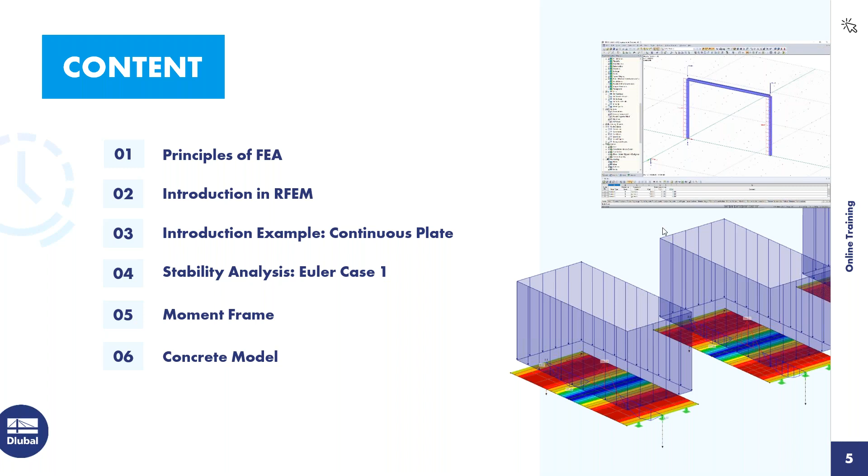So now we can dive right into the first subject, which is the basics of FEA software. When using computer software like FEA software, it is usually based on the displacement method. Another method you may be aware of is the force method, where the unknown is the force and the internal forces can be calculated. With the displacement method, the unknown is the displacement. So to solve for this, the displacement vectors must be calculated, and then the internal forces and support reactions can be determined.

So the main problem is an analytical solution can be difficult to determine with large complicated structures. Doing hand calculations for some structures with complicated and odd geometry can almost be impossible or feel like it's impossible. The limits are being reached with large complicated structures, and it's just difficult to get accurate results. And so this is where FEA software comes in.

So structures can now be modeled and converted into a finite interconnected element mesh. The material and cross-section properties are given at each FE mesh node, and then the mechanical behavior is transferred between these elements. Discretization is a word that I would like you to walk away with, and this is the act of structures being submeshed into finite elements, which is done in FEA software.

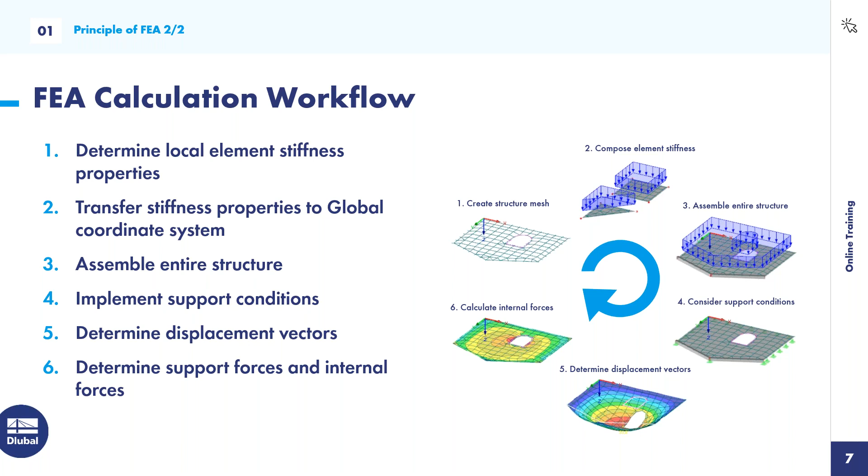So now we can move on to our example. For this example, you can see a couple of continuous plates, and we are going to compare the moments between these plates with the continuous beam on the end so we can get an idea of how the calculation differs between those.

But before we do that, I do have a question or a test to give. So I'm going to pull that up, and you should see that on your screen right now. I'll just give everyone about a minute to answer that, and then we can go over the answers.

Okay, so it looks like almost everyone has answered, so I'm going to close the question. And you can see the results here. So it looks like 18% of you answered the second option, and 82% of you answered the first option, and it looks like most of you got it right. So the actual correct answer is: the decomposition of structures into finite elements is what discretization is. So that's great. Good job.

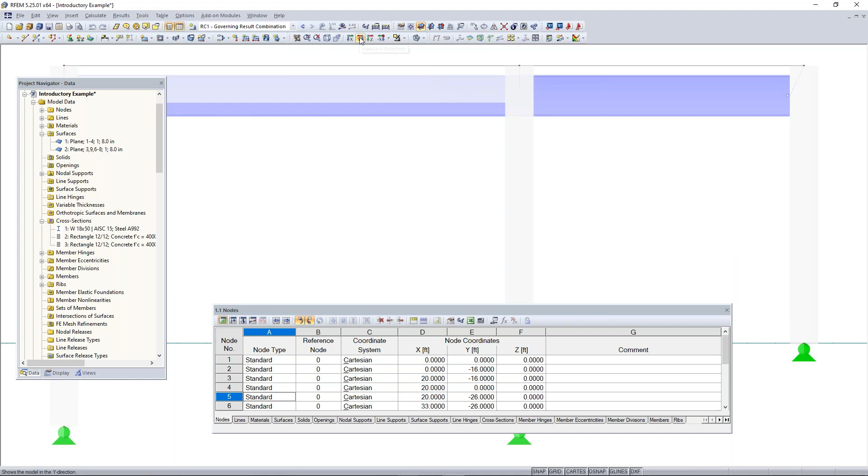Also, we have our insert menu. So if we go up to Insert, this is another place where you can insert model data, such as nodes, lines, and materials. We can also find these options up here in the toolbar. We can also change the view of the model. So if we go up here, you can see in this category of the toolbar, we have views in the X direction, the Y direction, and the Z direction. We can also change these into the reverse direction. So if we want an elevation view of our model, or maybe a top-down view, we can choose these views.

Then in the project navigator, we have at the bottom here in a folder called add-on modules, our add-on modules. RFEM is great for viewing things like internal forces, but if you want to design your structure or elements of your structure, you will need to use add-on modules, and all of the student versions of RFEM come with every single add-on module. So this is pretty handy, and you can play around with these. They're basically just for design of different materials, and you can see that's how most of them are organized.

You can also find the add-on modules up here in the toolbar, and you can see that they're organized again based on design. Next, we have in the project navigator our display tab down here. The display tab basically allows you to turn aspects on and off within RFEM. For example, we can turn off something like our surfaces, and this just turns off the rendering and display. The surfaces are still there within the analysis, but this just allows you to turn them on and off visually. You can see that this is all organized based again on these expandable and collapsible folders. So things like loads and results, we can also turn on and off as well.

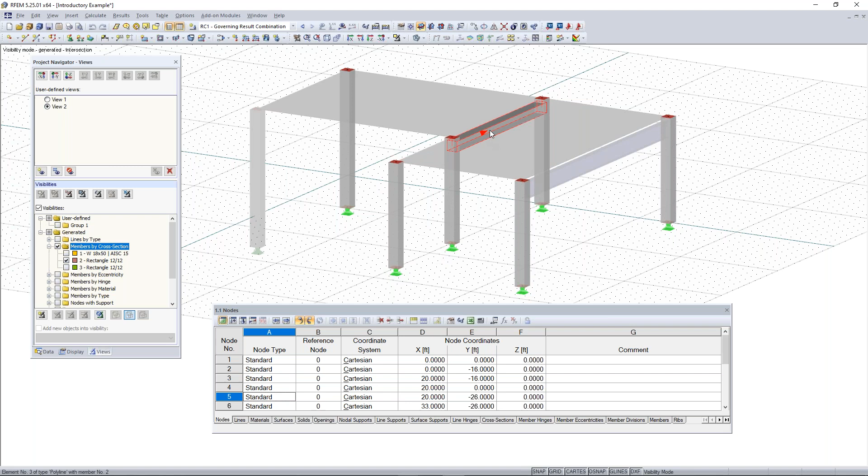And then the next tab we have is our views tab. So we can create a visibility by turning our visibilities on. You can see right now I have my members by cross-section checked. If I turn this visibility on, only my members by cross-section that have a cross-section of W 18x50 here will be shown. So that's my beam member right here. If I turn that off, then everything is turned off within my model.

And I can do the same thing for materials. So if I only wanted to view, let's say steel A992, then this is the only thing that will be shown in my work window, and you can see the rest of the model is grayed out. I can right click and uncheck show hidden objects in the background, and then we have just simply our beam there.

Next tab to show, if I turn off my visibilities, is the results tab, and this is the last tab in the project navigator. If I turn on my results, you will see that the results tab will pop up here. Again, it's organized similarly to the display and data tab. I'm not going to go into the results in detail right now, but we will later on within our other examples. So I'm going to turn these off.

And then the last thing to go over before we hop into our example is how to navigate through RFEM. We can click in the scroll wheel button if we want to move our model around. You can use the scroll wheel to scroll in and out, and then we can hold Control and click in the scroll wheel to rotate the model.

If you don't have a scroll wheel, you can go up here to this tool, called Move, Zoom, and Rotate. You can click on that and then left click to move. You can also hold Shift and zoom in and out with left click, and then you can hold Control and rotate the model. So that's pretty handy. You can also do all of this with the arrow keys on your keyboard, and they perform the same function.

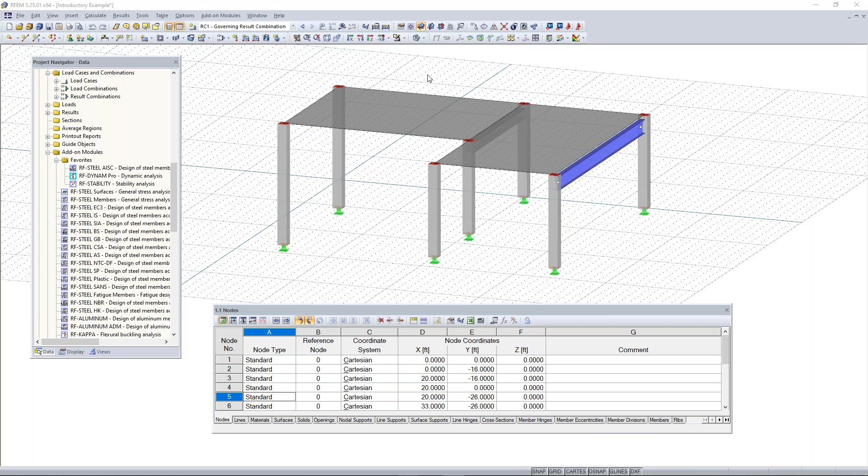So now we can go in and open our new model to start off to model our continuous plate example. First, let's go up to the new model button, and this is a way to create a new model. You can also do this by going up to File and clicking New. Then we'll go to our model name, and we have to give each model a name. So we'll name this continuous plate example. You can also enter a description for your model. You don't need to enter a description, but it is an option here.

Next thing to look at is the type of model. This is going to be a 3D model, but we could make this a 2D model, and you can choose the plane where you want your 2D model to lie in: XY, XZ, and then also the YZ plane. So those are some options here. We're going to leave our type of model as 3D, and right next to that is how the load cases and combinations are classified, and you can select which standard you want your load cases and combinations to be according to.

We have a long list here of international standards, so we have the US, Canada, Eurocode, and a list of others. So for now I'm going to leave this as none, but let's say I wanted to design my model according to the ASCE 7-16. We have the option to create combinations automatically based on the load cases you create, and then the action categories are taken from there as well, and everything is created automatically. For this example, we don't need to worry about a standard, so we're just going to leave this as none.

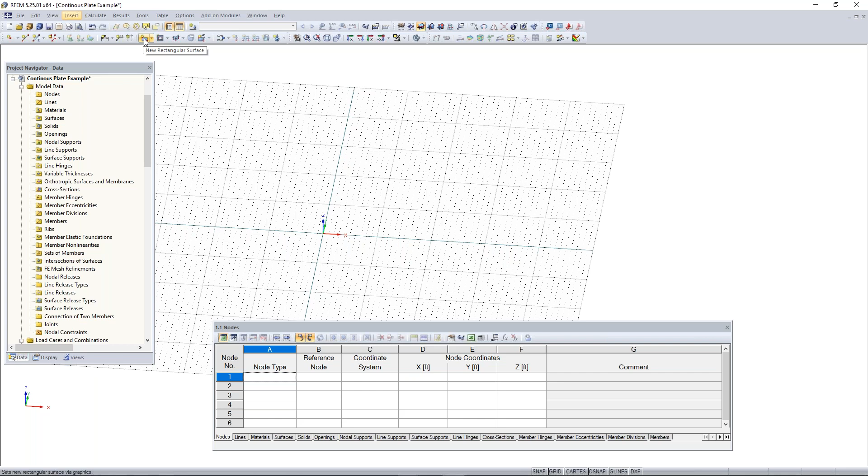So we'll click OK, and now we can begin with modeling our concrete plate. To model a 2D surface in RFEM is pretty simple. All we need to do is either go to the Insert menu up here and then Model Data, and then we can go to Surfaces, and you can see we have a lot of different surfaces to choose from. We're just going to choose Plane, or we can choose Plane and then Graphically, and then we can choose a rectangular surface - our plate today is going to be a rectangular surface. Or instead of going to this menu, we can simply just go to our toolbar up here and locate the new rectangular surface toolbar button, which looks like this right here, and we can click on it.

Our new rectangular surface dialog box will pop up. The only thing you need to worry about here, if you're not changing anything, is we'll keep the stiffness as standard. We just need to tell the program what material the surface is going to be and what the thickness will be.

Right now it's saying create new material. We can either create a new material and enter the properties using this button, or go to our material library and select a predefined material. So we'll click on that button, and the material library will pop up in just a second.

This is the material library within RFEM, and whenever you're choosing a material for any element, this is what will pop up. On the left-hand side, we can use the filter to find the exact material we're looking for, or type it in the search bar. I'll just use the filter for this example, so we can choose concrete, and then choose concrete again for the subcategory.

I'm just going to use ACI concrete for this example, and choose the latest ACI standard, 2019. Then I'll pick concrete 4000 PSI. I'll choose that, and down here you can take a look at your material properties if you want to check those out. Then we can click OK.

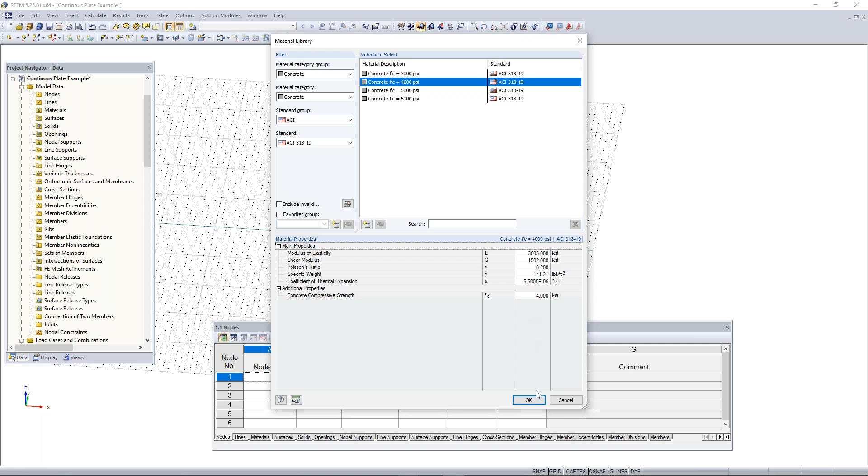Now we have our material chosen, so all we need to do is tell the program how thick we want this material to be. By default, for imperial units, 8 inches is selected. We want to increase this to 12 inches for these plates. Then we can click OK, and now we can draw our plate.

My cursor has turned into this reticle-looking cursor, and I have the coordinates right next to it telling me where I'm located along the XY grid plane. I'm going to choose the origin and draw a 32 by 16 foot plate. So all I need to do is move horizontally 32 feet, then move up 16 feet in the vertical direction, and then left click.

So left click at the origin, then left click a second time to mark that second point. Then I can right click, and once I right click, that will cancel out of the tool. You can also hit escape if you like to cancel out of a tool.

Now you see we have our plate here, or our rectangular concrete surface. The rendering in RFEM is just simply a 2D element with boundary lines defined, but in the calculation the stiffness will be taken as 12 inches thick, so no need to worry about the rendering. This boundary line is always located at the center of the surface, so there will technically be 6 inches on one side and 6 inches on the other side.

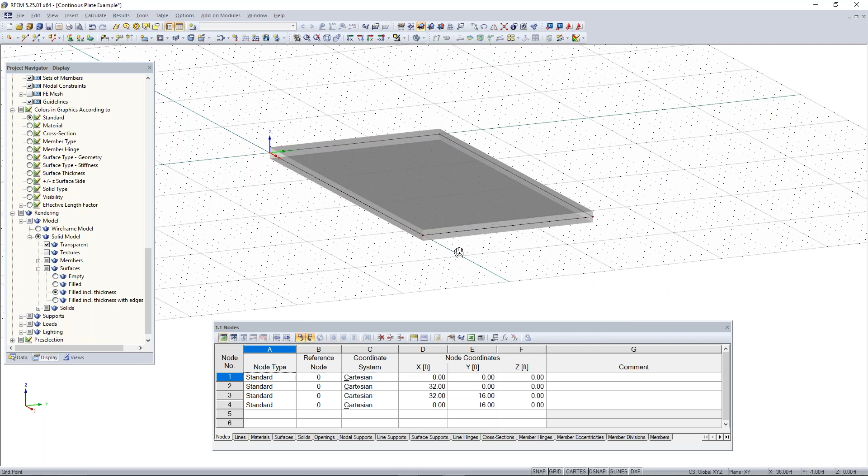If I go to my display settings and scroll down, we can change the rendering real quick just to show you what I'm talking about. If I go under rendering and change this to filled, the definition of the surface is always at the center. So if this is 12 inches thick, there's 6 inches of thickness on one side and 6 inches on the other. I'll turn this back to default, and then we can move on with modeling the other plates.

I can model the other plates by just going back to that tool and clicking OK. I'm going to model the second plate right above the first one, 5 feet away from the first plate. So I'm just going to draw this one, and again it's going to be the same dimensions, 32 feet by 16 feet. Then I can right click to exit out of that.

Let's say I already have this surface here and I need to duplicate it. I can simply select this second plate by highlighting it from right to left or left to right, and then use the tool up here called Move and/or Copy.

This tool allows me to make one copy of the element I selected, and then I just need to tell it which way to displace it within the plane. I can either enter displacement vectors, or use this graphics tool. I'll click this button, choose my bottom point, and move it 5 feet above where this plate is located. I'll hit OK, and now I've made one copy of this plate.

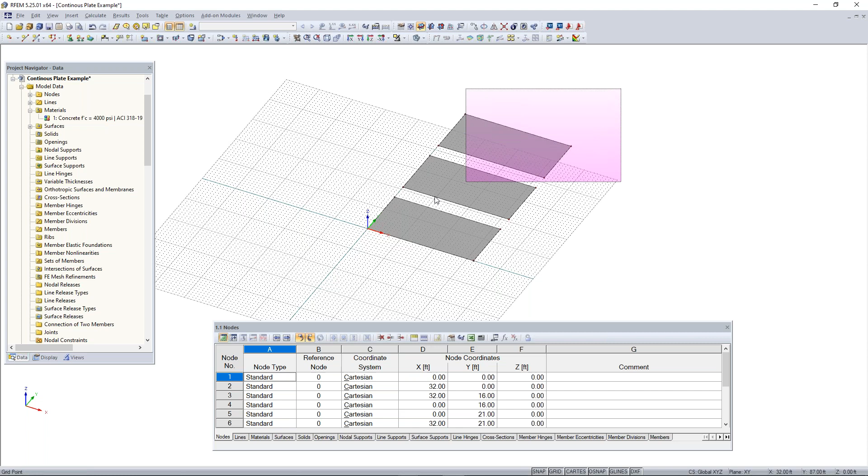So now we have all three of our plates here, and since my grid is only 50 feet by 50 feet, I'm just going to highlight all of my plates, left click, and then move my plates down into more of the center of my grid.

Next thing we want to do is model our beam. So I'm going to create a new cross section or create a new member. To create a new member, we can either go through the insert menu or choose the button here, new single member. I'll click on new single member.

Under new single member, I'm going to go to the cross-section library. This is the new single member dialog box, similar to the surfaces dialog box, where we choose our member type. For beams and columns, we want the member type beam. Then for our cross-section, we can choose cross-section start, either creating a new cross-section or going to the cross-section library to choose a predetermined shape. I'll click on the cross-section library.

Once that pops up, you can see our cross-section library is organized by rolled and built-up sections based on a standard. Then we have parametric thin-walled sections, where they're parametric so you can choose the dimensions manually. We have parametric massive, usually used for concrete, and parametric timber, which you can use for timber and choose dimensions. Since we're using concrete for these plates, and they're rectangular in shape, we're going to use the rectangular cross section.

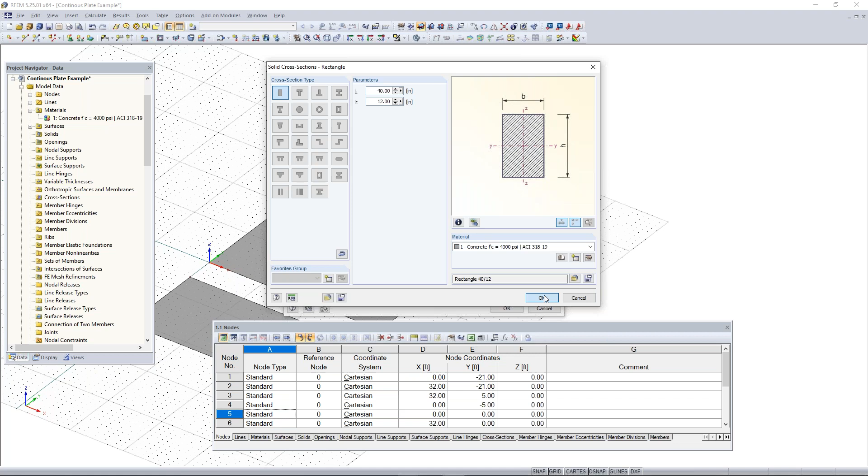The rectangular cross section parametric window pops up, and we can change our parameters. We can make the base 40 inches and the height 12 inches. Now that we have our dimensions in, we can choose our material just like the surface. Since we already defined this concrete 4000 PSI material, we can simply use that instead of going into the material library again. We click OK, and then click OK out of that box.

I'm just going to draw this continuous beam 5 feet above this plate, so it resembles this plate, and then we can easily compare it in results later on.

Once I draw my beam, you can see the rendering looks like this rectangular shape. If I change my model from a solid transparent display to a wireframe display, you can see that all members drawn in RFEM are simply 1D elements, and that's how they're calculated in the background. The shape you see is just a render over that 1D element, and all that's used is the cross-section properties and material properties to calculate the results on this member.

You can also see that our surfaces are just made out of these four boundary lines, and this dotted line shows that there is a surface made up here. Again, we can use this button to change the rendering of our model, and then move on with dividing up our lines and adding some supports to our model.

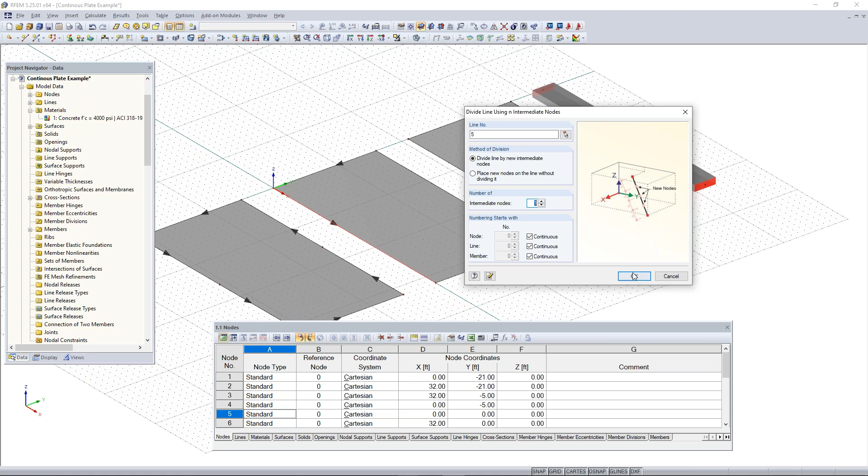And so what we can do is choose how many nodes we want to divide this line equally by. We're just going to choose 1 and click OK. And then you can see the line is divided equally with just this 1 node in the middle. So then we can again do the same thing for this line and click OK. And now we have our 2 lines here divided by our nodes.

The third option for dividing a line is to use the distance tool. So with this tool, you can divide a line by distance and get a little more accurate on where you place your nodes. So this is mostly why you would want to know the orientation of your member when you're dividing a line, so you can see that I've chosen this line, and here's the start, here's the end, and I can type in 50% from the start or 50% from the end, or I can type in a specific distance. You can see 50% is halfway through 32 feet, so 16 feet.

And we want to use the true line length, and then we want to divide this line by a new intermediate node. So I'll click OK, and then you can see just like this, it's divided halfway through, and then I can do the same thing for this last one. So now what I need to do is divide also this member. So I can just do that using a distance halfway through, and I'll click OK.

And now what we need to do is add supports to the rest of these plates, and we need to add line supports to the center of these plates. So what I have to do is add in a line. So I can just go up here to the new line tool. And then I can draw my line, and you can see my cursor snaps to these nodes here. So I'm going to snap to this node and then to this last node.

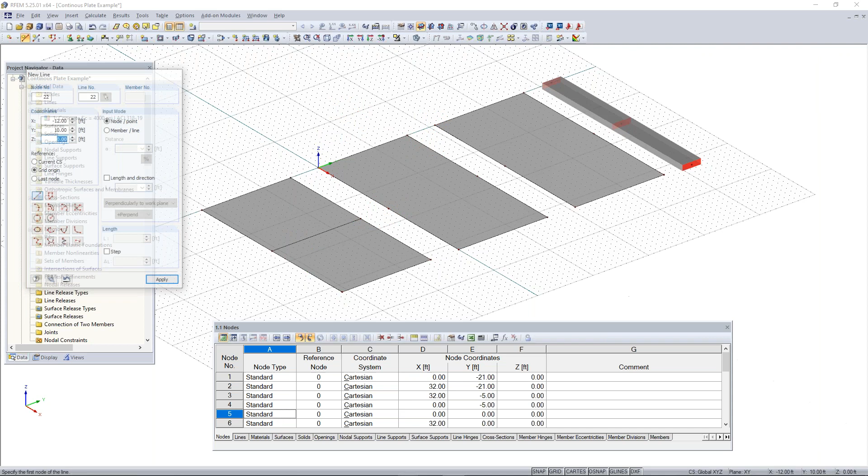And then I can exit out of that tool, and instead of drawing the rest of these, I can use this pretty powerful function where I can click and select a line here. And whenever you click and select something, you can hold Control and then left click and drag. And that allows you to make a copy and drag that element to wherever you want. So I'll left click, hold Control, and then I can drag this line again to the last plate there. And now we can add in our line supports.

So within RFEM, there's two different supports. We have nodal supports for just single points, or line supports to support the whole entire length of a line. So I'm going to go up here to the button New Line Support. And then I'm going to add in hinge supports. So what I can do is choose from two different presets we have for line supports. The hinge support is fully fixed in translation, but fully released in all of rotation. And the rigid support is fully fixed in all 6 degrees of freedom. So you can see how all the degrees of freedom are checked off, showing you how the condition is defined. So I'm going to use the hinge supports and click OK.

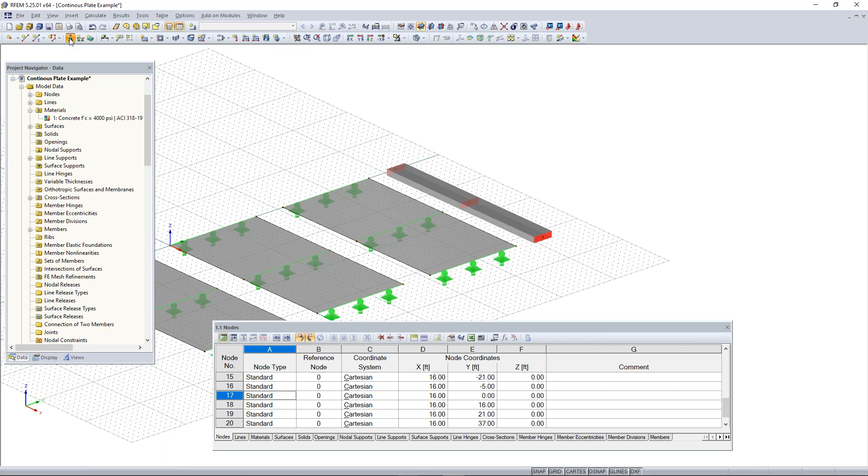And then I can choose and click on each of my lines here. And I can simply do that for the rest of my lines to add in my supports to these plates. And then we can do this for the beam, but for the beam, we're going to be using nodal supports. So I'm going to go up here to my new nodal support. And this is similar to line supports, but you can see we have a couple more options. So we have hinged, rigid, and then sliding in the X and sliding in the Y directions.

For the first two supports, they're going to be hinge supports. So I'm going to choose hinged. And then I'm going to choose my two nodes here. But for the last support, we need to make this a different type of support and change the definition. So what I want to do is create a new nodal support.

And then under the new nodal support dialog box here, you can see that we have mostly just our support conditions down here for defining our support. So for this one, we want all 3 degrees of translation in the X, Y, and Z directions to be fixed. But for the rotation, we want to fix the rotation about the x-axis.

And the reason for this is because if all 3 of these supports here on this beam were just simply hinge supports, then this beam would be able to rotate infinitely about its x-axis, and that would cause an instability within the program. So we need to have one of these supports to lock the rotation about the local x-axis.

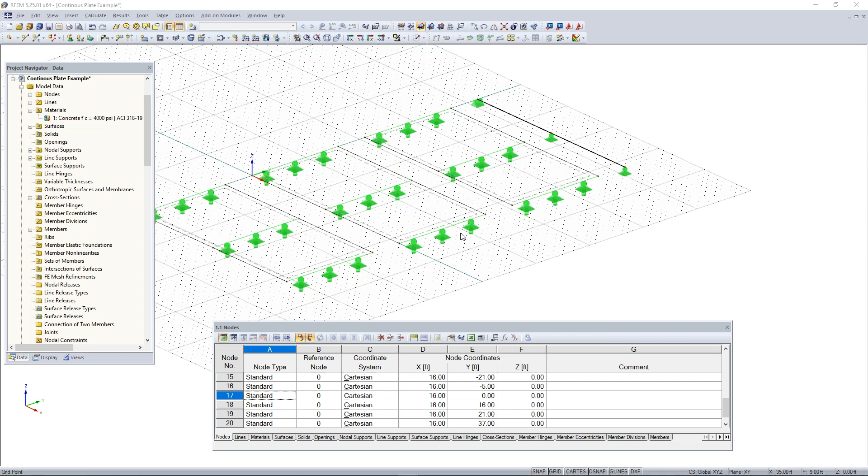So the next thing, now that we have our model fully entered and all the model data created, what we need to do now is add in the loading now that we have our supports. So to add in loading in RFEM, the first thing you need to do is create a load case to assign that loading to. So we can go up here to this button, new load case.

And once I click on that, the edit load cases and combinations dialog box will pop up. So RFEM automatically created this first load case and assigned the action category dead to it. So what we need to do now is just enter in a description. So we'll just name this load case 1, since we're not designing this according to any standard and the action category isn't too important right now.

You can see that the self weight is automatically turned on for dead load. For this example, we don't want self weight activated, so I can uncheck that option. And you can see that the -1 in the z direction for the factor and direction is applied. What this does is basically just multiply this factor by the self weight of the model in the downward direction to simulate gravity. So we'll just turn this off for now and click OK.

So what I can do is right click to cancel out of that load tool, and then I can just move and rotate my model. And I can drag from right to left to select my loads. I can select all of them, double click them, and then all I need to do to change the direction or to flip the direction is add in a negative sign. I can click OK, and then I can rotate my model back. And then you can see my loading has been added.

I can also turn off this grid in the background now that we're done with modeling to get a cleaner look. So I can go down here and you can see these options down here are buttons used to turn off certain functions like snap, grid. You can also change your grid to a polar grid. We'll keep it as Cartesian. And then you can turn off some other things like guidelines as well. So we'll just turn off the grid, and now you can see we have just a cleaner look, better for presenting.

And then the next thing we need to do is to add our loading to our member. So for our member loads, we want to use member loads. Always keep that in mind. Then for lines, you want to use line loads. That's how you know the difference between these two. Since we're applying a load to the member, we want to use member load. And this member loading is going to be the same as the uniform load or the surface load that's applied here. It's just going to be converted into a linear load.

So we'll just keep the load type as force, of course, and it's going to be uniform. Direction, it's going to be a gravity load, so global z direction, we'll keep that the same as well. Then all we need to do is enter in our magnitude, and this magnitude is going to be 0.210, and it's going to be in kip per feet. So this is basically 210 pounds per feet. So we'll click OK. And really, we're just keeping these loads the same so we can then compare our results and see the difference between both our beam here and our plates. So I'm going to change this to negative.

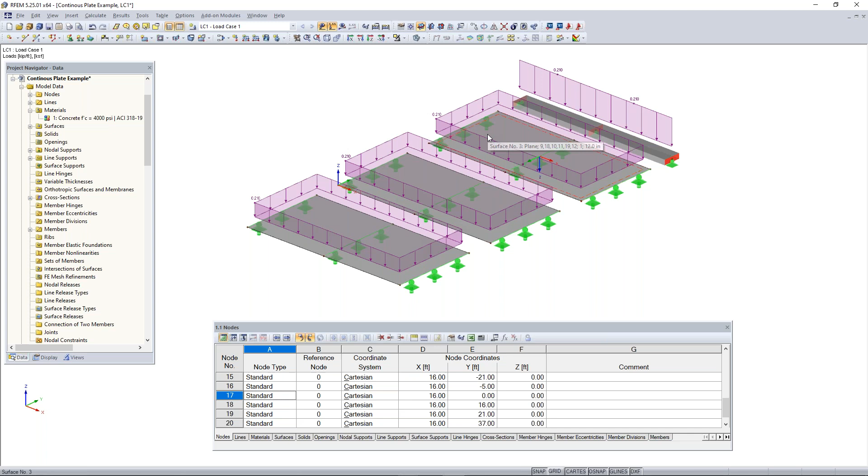And then we can now add in or edit our FE mesh. So FE mesh for members is not too important, but FE mesh for surface elements within RFEM is pretty important. This is what you need to look out for, and what we can do is go up here to calculate, and we can just see what the global FE mesh looks like when we hit generate FE mesh. You don't have to do this before any calculation, but for example purposes, I just wanted to show you what the FE mesh looks like. And it's easier to view if I turn this into a wireframe view since it's gray on gray. But you can see this is what each FE mesh element looks like on our surfaces here.

If I go to calculate and I go to FE mesh settings, by default, the FE mesh in imperial units, the target finite element length for each of these mesh elements is 1 foot. So this actually looks pretty good on our surfaces here, but for example purposes, if we needed to refine our FE mesh for certain elements, you can do this. So what I'm going to do is add an FE mesh refinement to each of these surfaces with different lengths. So I'm going to turn off the global FE mesh for now. And then I'm going to turn this back into a solid transparent view. I'm going to right click on the first surface and go to FE mesh refinement, go to new.

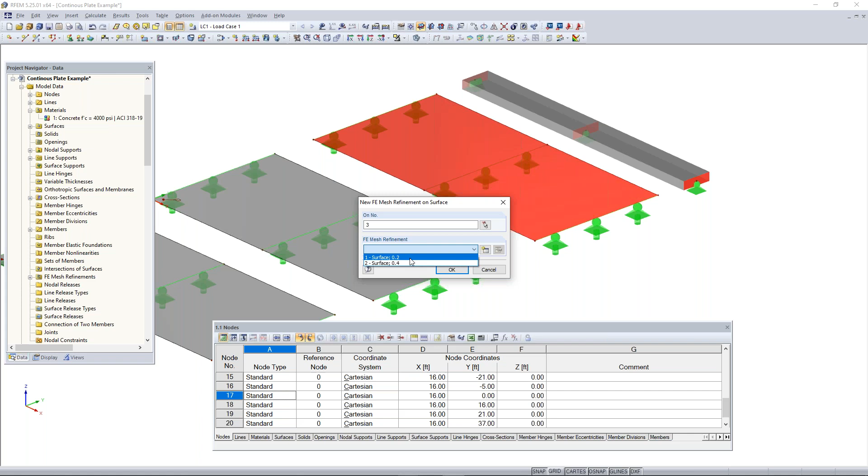And then the last one, we'll do the same process. And you can see those other refinements that I created, we could choose as a preset if we didn't want to have to create a new one. But for this one, for this surface, we want to increase the length to something like 0.6. And we'll click OK, click OK again.

And you can see the difference in FE mesh length between these from 0.2 feet to 0.4 feet to 0.6 feet. And that's kind of giving an example of how FE mesh lengths can change over these different plates here.

So then the next thing to go over would be the sections. So we need to add some sections to our plates here. So what I can do to add section cuts, and this allows us to take a cut down any section to view our results along that plane. So what I can do is go up here to our button define section, and I can hit the drop down arrow right next to this button to get more options with this tool.

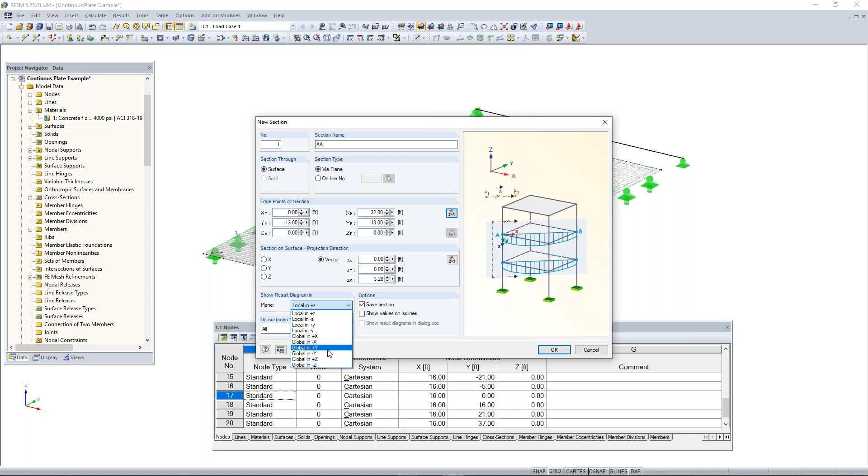And then the next thing we need to do is to choose which plane the section cut will be located in. So the local positive z axis is good, and that's the local z axis of the plate. Since it's lowercase, you can see you can also choose the global axis system as well. And then we want to save this section and click OK. And now you can see these dotted arrows here are telling us that we have a section cut, and you can also see the name of the section cut there as well.

Then if I want to add more section cuts, one to the center plate and one to the third plate, instead of going through that process again, I can simply just hold Control and then drag and drop my section cut, and it did not copy. So let's try that again. Hold Control and then we can drag and drop. Control Z is also a great function to undo things. So we'll try this one more time. And the drag and drop feature right now is not cooperating. So let's try one more time.

There we go. And then we can do that just a third time for our third plate. So hold Control and then left click and drag. And then I'm just going to make that copy. And now we have our section cuts on our plates. And then I can change the names of these section cuts. So right now this one's AA, but these ones have odd names to them.

So I can go into my project navigator, and then I can go to my sections folder here and expand that. And you can see the names here. So I can double click on one of them, and I can change this name from AA to AB. And then I can change this third one from this to AC and click OK.

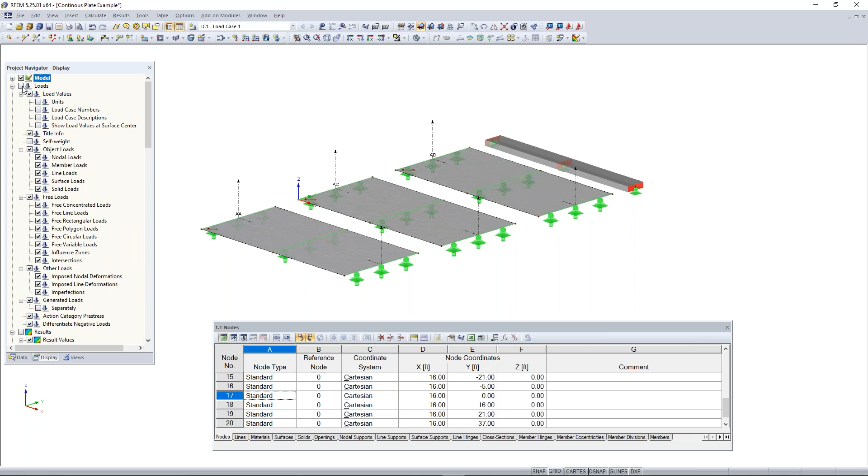So if I click OK, the self-weight is now activated. And if you wanted to see a graphical representation of the self-weight, you can go to the display tab in the navigator, go to the loads section, turn on my loads, and then also turn on my self-weight loading. That's normally hidden, but if you wanted to view what the self-weight loading looks like, you can see that there as well.

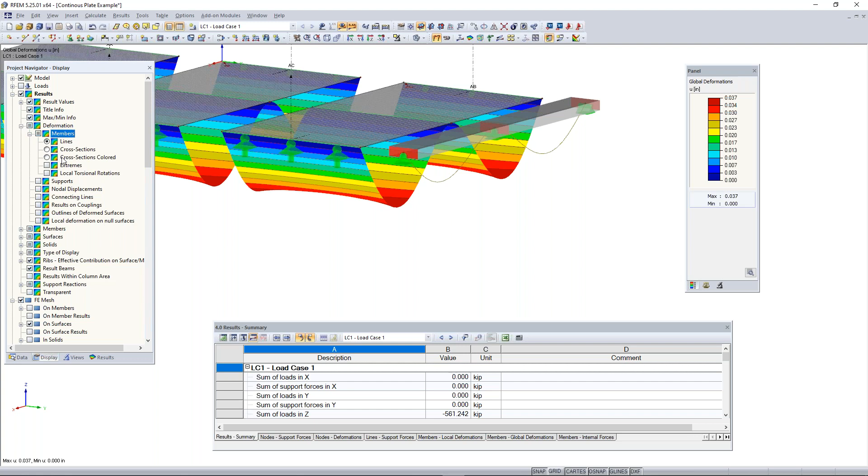I can go into the results here, and under results, we want to expand deformations and then expand members, and I can turn on colored cross sections. So then you can see the rendered colored cross section deflection shape of our member shown here, just kind of giving a better visual of what that looks like.

And you can see it's basically almost the same as the deflection for our plates. We're going to go over comparing these results in just a little bit.

Then the next thing we can view, if we turn off our deformations, is the results on our single member. So if I check on members and then under internal forces, I can check off the option to view our axial forces. We can also view our shear forces. So VZ is for shear in the local Z axes.

Again, if I right click and turn on the local axis system here, you can see that the local axis, so we have our Z direction. This is the shear in the local Z direction. If I turn this into the wireframe view, we can get a nice look at what that shear diagram looks like as well.

Next thing we can also view is our moments about the local y-axis, so we can take a look at what that moment diagram looks like as well. Looks like we get a max moment here of negative 21 kip feet.

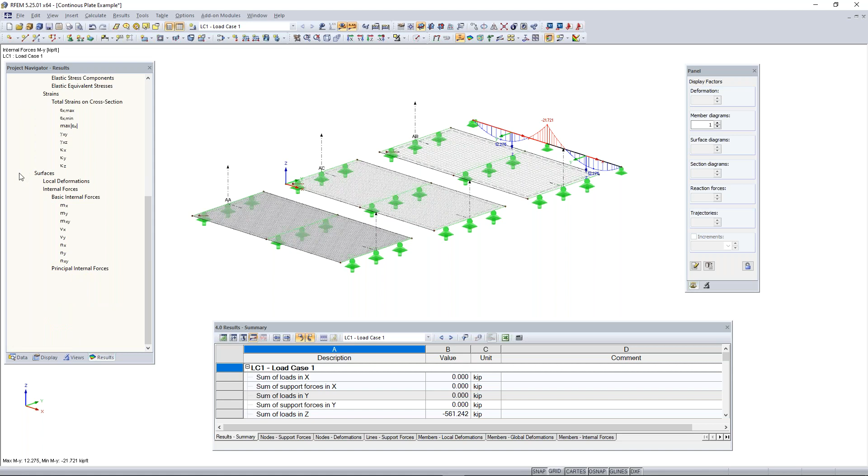So next we can also view the surface results. For example, we can take a look at our internal forces of our surface, and the moments or MX along the local x-axis. I can show the local x-axis of my surface here if I would like to.

By right-clicking on it and then turning on the local axis system for all surfaces, now you can see what that axis system looks like. It's a little similar to the member axis system. So these are the moments along that x-axis, and you can see again that it is color-coded.

This panel on the right-hand side will give you your max and minimum results and that color coding as well. You can also take a look at shear on our surfaces here, so this is shear along the x.

And then we can take a look at our NX, or our N forces, our axial forces on our surface. We can take a look at what those look like as well. We don't have any right now because there are no forces in that direction.

So next thing we can also look at is our support reaction. If we go down here to support reactions, I can turn that on and you'll see what those look like. The line support reactions are a little more complicated, but this is just the forces or the reactions along the line here, so it's going to be a uniform reaction there.

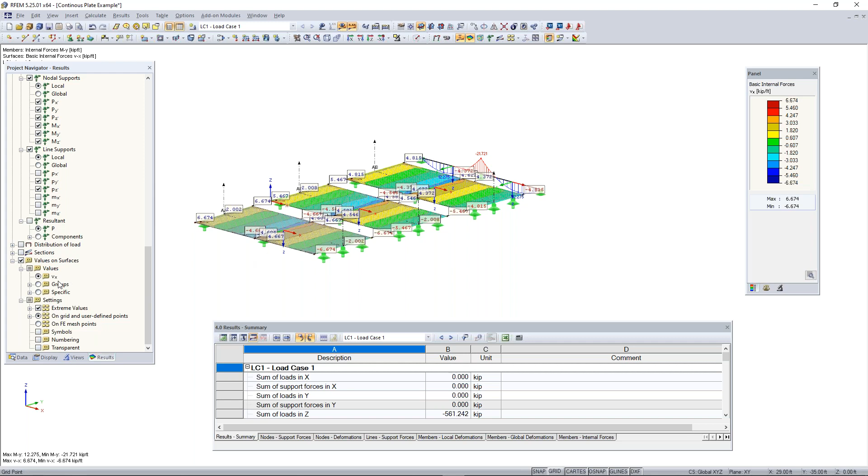So we can get a look and take a look at all of those moment reactions. And then the next thing we can take a look at is values on surface. So we can turn on or turn off our support reactions now to get a better view of the values, and we can show basically the extreme values on our surface to take a look at those forces in the surface as well.

Now that we've gone over the results, we can take a better look and activate the section cuts here. So now that we've added these section cuts along our surface, we can turn those on, and now we can basically see what the shear of the surfaces are with a shear diagram and that section cut plane. So right now you can maybe get a better look at how those results differ in accuracy between these different plates here.

So like I said, you can go to the calculate menu. This is a good time to talk about how to choose the size of your FE mesh. If we go to the calculate menu, and then to the option here, calculation parameters, we can go under the global calculation parameters tab here. And the option I want to look at right now is activate shear stiffness of members.

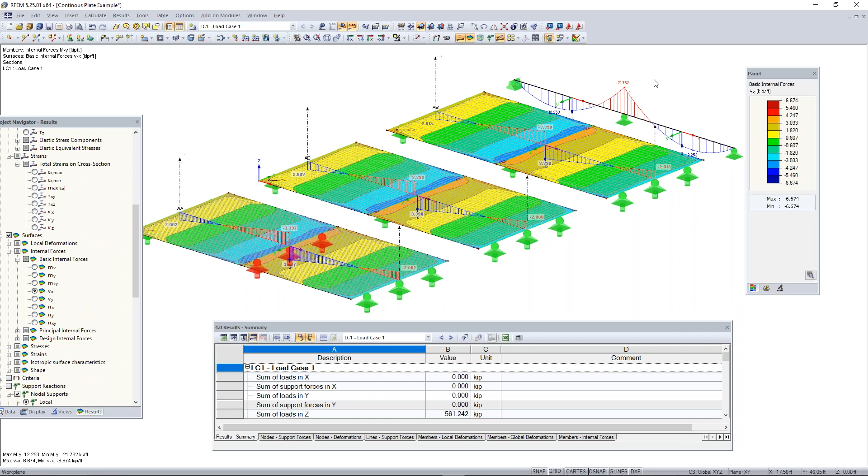So if I hit calculate all - before we were getting about negative 21.2 kip feet on our beam here, and so now we should be seeing something smaller. This mostly needs to be turned off because the methods used in school assume an infinite shear stiffness when in reality there are some shear deformations happening when the member bends here. So you need to keep this in mind when comparing hand calculations of deformations in RFEM.

Right now I just want to go back to the PowerPoint so we can go over and compare some plate theories. So if I hop back to the PowerPoint, then we can go over plate theory. To help understand these plate theories, I will use beam element theories as an analogy. So the first beam element theory is Bernoulli's, and the second beam element theory is the Timoshenko theory.

So these are the basic assumptions for Bernoulli's theory. The first assumption is that the cross-section remains in plane and perpendicular to the member axes. And then the second assumption is that there is no consideration of shear deformations, and the shear stiffness is completely rigid.

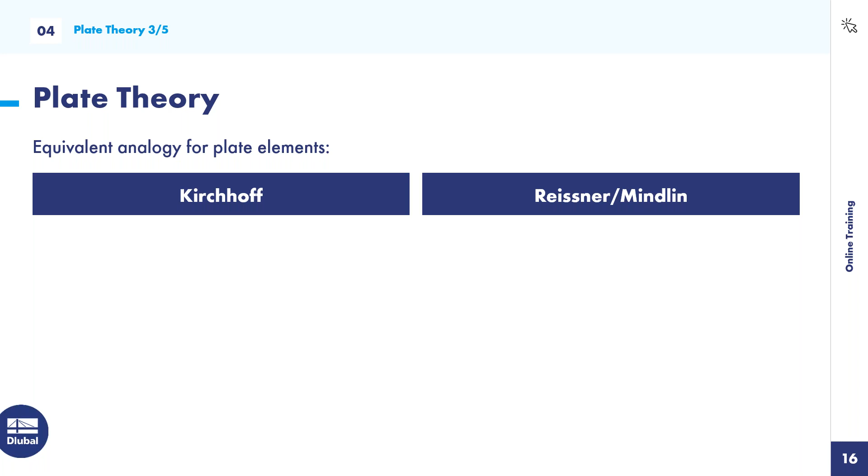For the Kirchhoff theory, we have to assume we're using a geometrically linear analysis with small deformations. For the material, we're using Hooke's law, a linear elastic material. Cross sections are assumed to remain flat with no warping, and we're assuming constant thickness. Most importantly, we're assuming there is no consideration of shear deformations.

Then for the Reissner-Mindlin theory, we're assuming basically the same aspects as the Kirchhoff theory, but most importantly, we're taking into consideration shear deformations, and we're also taking into consideration transverse and lateral strains. So these two assumptions are the same as Bernoulli's - for Bernoulli's we weren't taking shear deformations into consideration, whereas for the Reissner-Mindlin theory we are. Now, for transverse and lateral strains, you may be wondering what that looks like.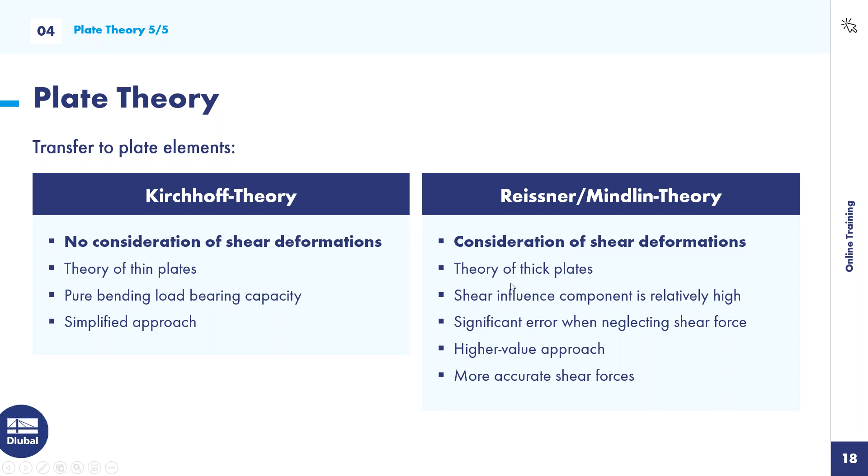So now we can switch back to RFEM, and then we can take a look at where we can change those two theories within the program. If we go up here to Calculate, and then go to the Calculation Parameters, we can see under Global Calculation Parameters, we can go down to Plate Bending Theory, and you can see we have Mindlin and then Kirchhoff. So this is where you can change between the two theories.

And again, this option up here, Activate Shear Stiffness of Members - this is basically switching between the two, Bernoulli's theory and the Timoshenko theory. So if you wanted to compare your hand calcs in school to the calculations within the program, and maybe you're seeing some different deformations for your members or plates, the issue could be that you're assuming infinite shear stiffness when in reality the shear stiffness is limited. So turning off this option would yield the same results.

So then if we turn this to the Kirchhoff theory and hit OK, we would have to rerun our results so we can see what those look like. Once those results run, it should be pretty quick. You can see we're actually now getting lower shear forces in our plates. Before we were getting something like negative 3.8, and now we're getting forces like 3.5. You can also see how the results differ between these two plates with the different FE mesh elements or lengths.

So next, I have another question. Let's go back to the PowerPoint again. For this question, if you could just answer it in the chat, that would be great. So the question is, what happens if the shear stiffness is activated? There are three different options, A, B, and C. If you could just enter A, B, or C in the chat, I can take a look at what the majority of everyone's answering, and then we can go over the answers in a minute.

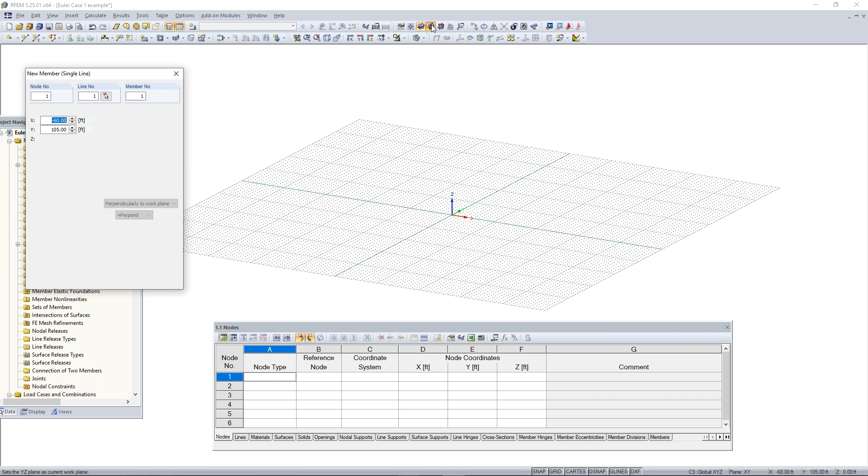And once we have our cross-section and material entered, we can click OK again. And this member is going to be a column member. So I basically want to draw this column out of plane, and there's a couple ways to do that actually. So I can either change where my grid lies in my work plane by going up to the XY plane, and I can either choose to change this to the YZ plane, or I can choose to change this to the XZ plane as well.

So to draw my column vertically, I'm just going to select the origin, and then I can left click and then draw it 30 feet up. And now my column's drawn.

Also, another way to draw something perpendicular to the work grid is to choose this option over here in our panel, length and direction, and then I could have just typed in 30 feet, chose perpendicular to work plane, this option here, and positive, and then you can see that I could have placed my column like so, anywhere perpendicular to the work plane. So a couple of different options to choose from. I'm just going to delete this. And then now you can see we have our column.

And the next thing we want to do is add a support to the bottom here to support it. So I just want to add a nodal support here. And something to go over real quick is highlighting things within RFEM. You can drag from right to left or from left to right, and this will only select objects that are fully engulfed within this box here. So you can see I'm only selecting my node. Maybe it'll be a little easier to see up here.

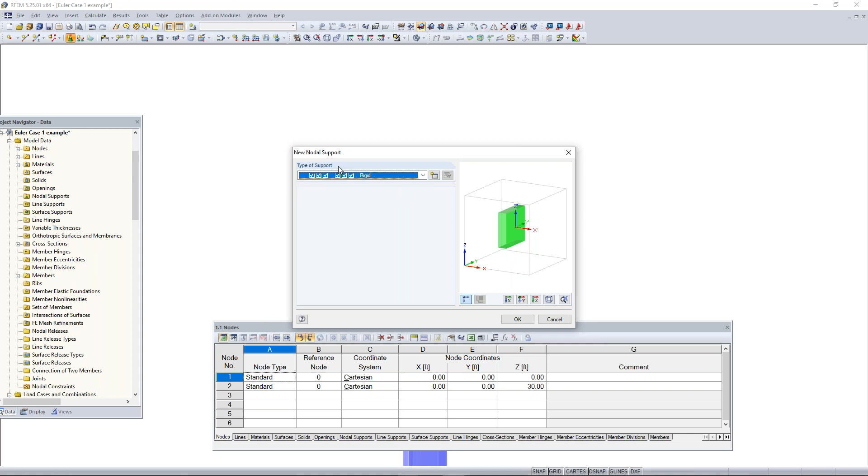So if I drag from left to right, only my node is being selected, but if I drag from right to left, then anything touching this box will be selected. So now you can see that both my node and my column is selected when dragging from right to left. So this is helpful because if we go to new nodal support, and then instead of hinged, we're going to choose the nodal support rigid. So now all 6 degrees of freedom are selected. I'm going to click OK.

And then what I can do is just drag from left to right. And now you can see that that only selected my node, and it also added my rigid support to the node there. So I can make this a little bit bigger to see, or actually I can't right now. But now you can see we have our column fully supported at the bottom. And so now we just need to create our loading.

So I'm going to go up to my new load case button here to create my new load case. I'll click on that, and then the edit load cases and combinations dialog box should come up. And you can see again, our dead load case is automatically created. So I'm just going to name this one test. And we also want to turn off again self-weight for this example.

And then I'm going to click OK, but I did also want to show you that our load combinations are then generated automatically. We only have one load case, so we're only going to have one combination for LRFD and ASD, but you can kind of see how that works when you actually have other load cases with other different actions. And then we also have our result combinations that take all of the load combinations, create an envelope solution, and show you the max and min results. So that's just a quick overview of how creating those automatically works. We only need one load case for this example, so we can leave all this the same and click OK.

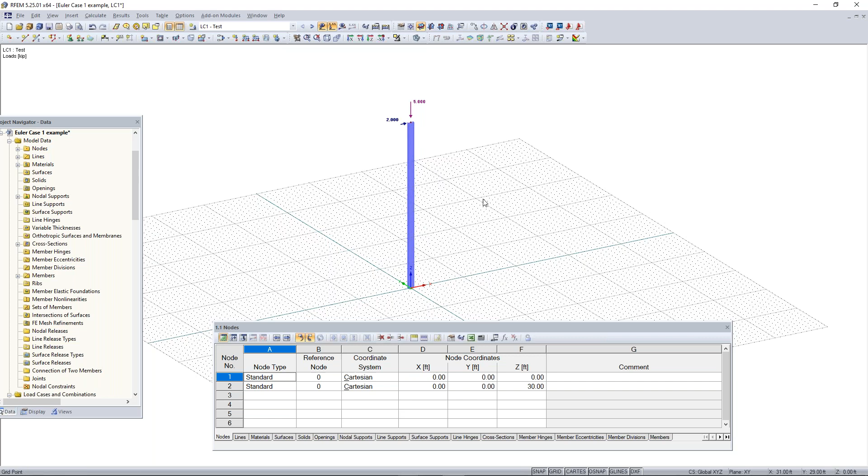And now I do need to show you something pretty important. So if I click on calculate all, this is actually going to run through our load case, load combinations, and result combination. I'm getting an error for very high deformations, but what we can see here is our global deformations.

So right now, if I look at this in the elevated view, and I'm just going to turn off my tables and grid, you can see that we're getting a max deflection in the x direction of 3.782 inches. And I can also display this as a colored cross-section to get a better look at this. So this is what the deflection of our column looks like with the applied loading. Again, maximum deflection is 3.782 inches.

We can also take a look at our member internal forces. So if I check on members, and then I take a look at the MY results, the moments about the Y axis, you can see at the bottom here, at the support, we're getting a max moment of negative 60 kip feet. So try to keep those results in mind.

So this is basically, for load cases, a linear calculation or a first order calculation, and I want to show you how this differs from a second order calculation. So now I'll go back to the load case and load combination window. So if I go up here to edit load cases and combinations, and then we go under our load cases tab.

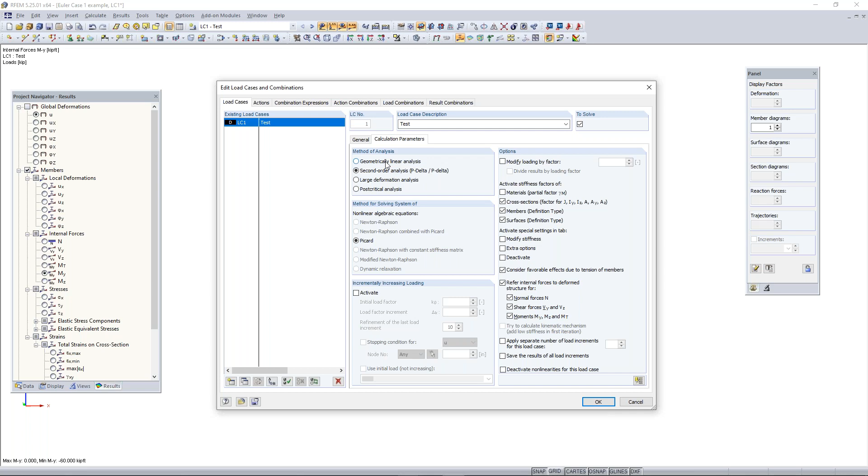You may recognize this analysis more as taking into account little p-delta and big P-delta. So that's what a second order analysis considers. Basically, linear analysis sets the equilibrium of the beam based on the undeformed system, whereas a second order analysis sets the equilibrium based on the deformed system. I can show that if we hit OK, the deformation and bending moment is going to increase if we run our results.

So you can see how taking into consideration second order effects can lead to higher results within your structure. Keep in mind that you will get two different results when switching between first and second order analysis. Like I said, load cases are always run by default as a first order analysis, and if we look at the calculation parameters for load combinations, these are always run as a second order analysis by default. So just keep that in mind.

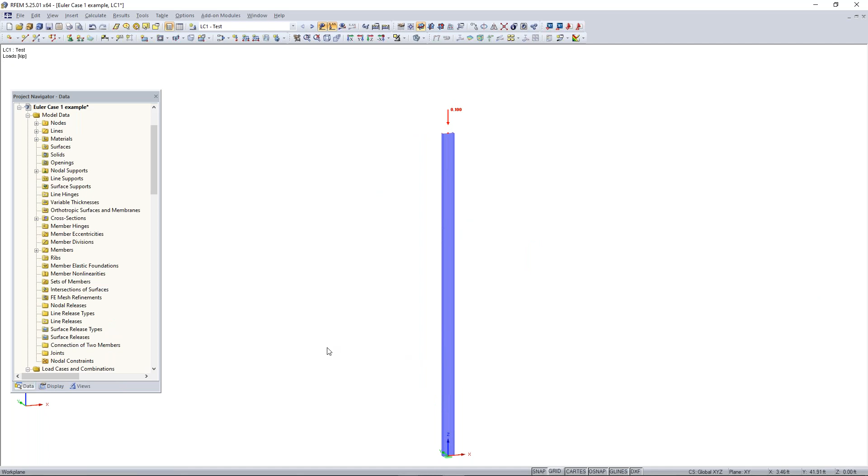So let's say now we want to run a stability analysis on this structure here. What I want to do is open the RF-STABILITY add-on module. Again, in the project navigator, you can scroll down and find the list of add-on modules. We have a favorites folder here, so if you want to save an add-on module to your favorites folder, you can right click on it and select favorite, and then that add-on module will be added, so it's not hard to find if you use it frequently. But what I can do is go to RF-STABILITY and double click on it. And like I said, all students have access to all of these add-on modules with the student license.

So once the add-on module pops up, this is what it looks like. It's basically just a dialog box within RFEM, and all of the information from your structure in the background is taken into account within this dialog box here. What RF-STABILITY does is it uses the help of eigenvalues and different eigenforms to perform a stability analysis. So quick background, Euler was a mathematician who came up with different cases to show the critical load factors as well as critical loads and lengths. And this is something that just every stability analysis does.

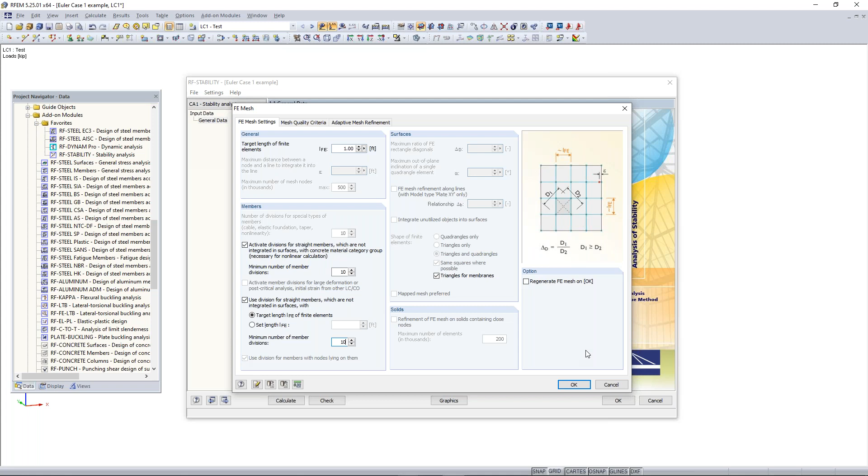So the first thing we want to do within this add-on module is make sure that the division of straight members is activated. That's always activated by default here. And what we want to do is go into the edit FE mesh settings for members here. Under the minimum number of member divisions, this is only set to 2, and for your members, you want to increase this to 10. This is important and just increases the accuracy for the division of your members, which is mostly how the program meshes everything in the background. So we'll click OK.

And then the next thing we can do is up here, we just want to make sure that we're choosing the right load case. So we're going to run the stability according to load case 1 here. You can also run your stability analysis according to a combination as well. Everything else we can keep the same as default. Calculation methods we don't need to worry about right now. And so we can go over here to calculate. And once we click that, the calculation should run pretty quickly.

And now you can see we have our critical load factors and magnification factors shown here. The critical load factor here on the left-hand side you can basically think of as the amount you would have to multiply the loads by in order to get an unstable system. Or it can also be looked at as the total percent of the loads your structure can take. For example, this critical load factor is 135 for our first eigenmode, and this is really good. If this was below 1, then we would have an issue, but we probably could just increase the loading or decrease the cross-section size and material of our structure with this critical load factor.

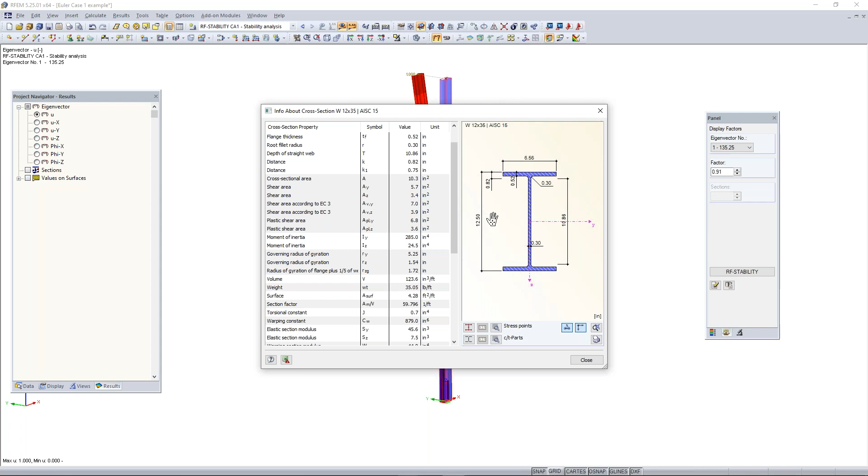And I think it's clear from the first buckling mode that the column will first be unstable in its weak axis direction. The weak axis of this column is in the y direction, and that's about the local z axis. So if I turn that on again, you can see that will be about the local z axis. The reason for this is pretty simple, because the moment of inertia for this W shape is the lowest about the z axis and highest about the y axis. So it makes sense why it will deform in that direction first.

So now we can go back, and now let's swap back to RF-STABILITY. So we can either go to our Data tab here and double-click on RF-STABILITY, or we can go to the panel and click on the button here, RF-STABILITY. And then under our RF-STABILITY add-on module,

again, we can take a look at our effective lengths factor, and the next thing we can do is show what it looks like when the structure is unstable because the loading is too high. So what we need to do is change the loading at the top of our column here to something higher that would cause it to be unstable. Right now we only have 100 pounds at the top of this 30-foot long column. So that's why our critical load factor was so high.

But let's say we change the loading, just for example purposes, to something like negative 14 kips. We can then click OK. And if we're getting an unstable structure, so if we run this calculation, let's say you get this error message saying your stiffness matrix is singular and the model is unstable. It's possible to calculate the critical load factors and buckling in the add-on module RF-STABILITY.

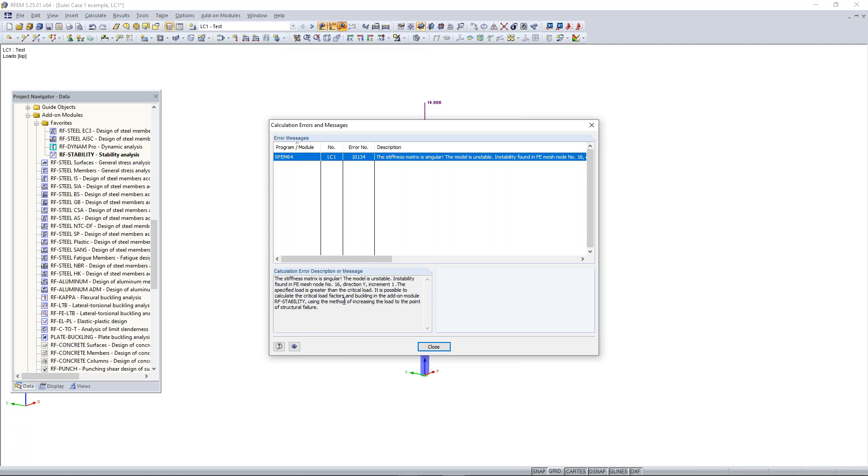If you get something like this and you're sure that your model is all connected and set up properly, the first thing you'd want to do is go to your load case 1 or your dead load case. Right now we have P-delta turned on, so we're taking into account second order effects. To run a stability analysis, we need to make sure this is set to a linear analysis. So I'll click OK. And then I want to go back to RF-STABILITY.

Under RF-STABILITY, we'll again set our load case to our first load case here. Make sure it doesn't have any second order effects to it, because if it does, we'll get an error within RF-STABILITY. So we'll run the calculation. And now you'll see that our first critical load factor in our first eigenmode is lower than 1, which again is not good. This means our structure can only take about 96.6% of the loading that we applied to it.

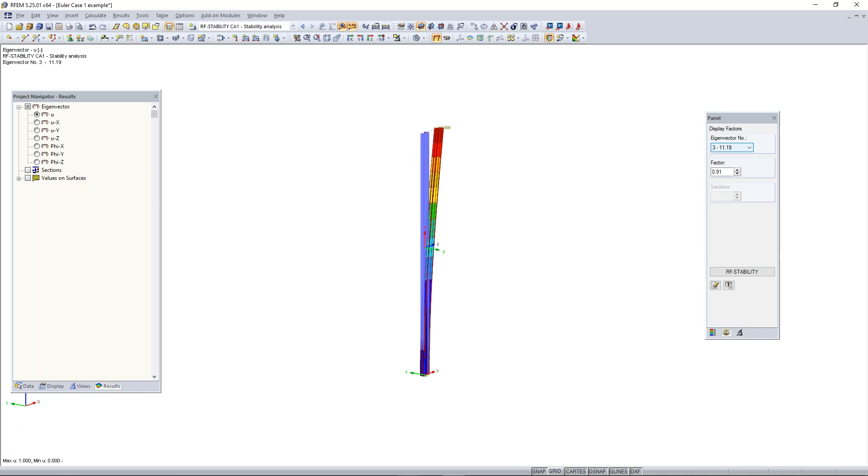It means it's unstable. So this is how you can check if your structure cannot take the loading you applied to it and if it's unstable or not. And again, you want to make sure that all these critical load factors are above 1. So we'll click OK. And again, if we go to graphics, we can take a look at what those eigenvectors look like. So now I'd like to go back to the PowerPoint, and I just have another question to ask.

So this is a true or false statement: the critical load factor specifies which factor can be used to increase the stiffness until the structural system fails. And the question is if this is true or false. So I'll give you guys about a minute to answer within the question section again, and then I'll look and see what the majority of the answers are. We can go over them.

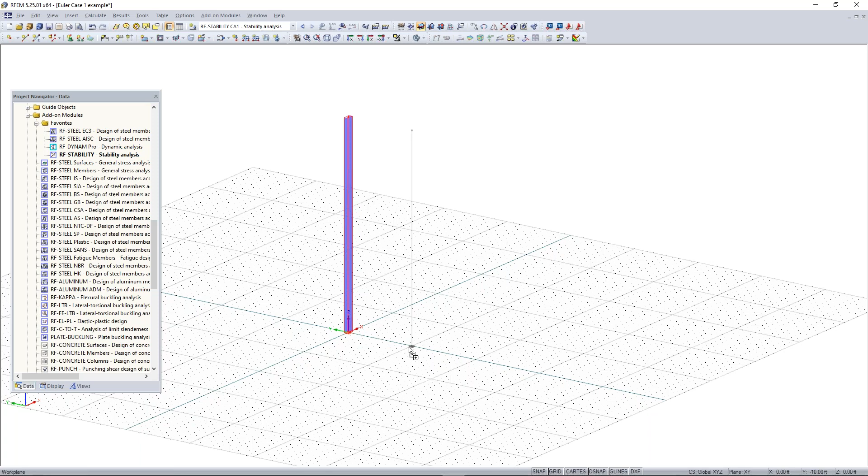So now we can move on to creating a moment frame out of this column here. So if I turn off the results and I go down here and turn my grid back on, we can right click and turn off the local axis system. And then what I can do is take this whole column here and I can highlight it and hold Control and make a copy of it 10 feet away. So now we have two columns here that will act as our moment frame.

Another thing we can do is to shrink the height of these two columns at the same time by highlighting only the nodes at the top of them and double clicking on them. And then we can shrink this down to 10 feet. And now we have two columns here, both 10 feet high. And we can simply just draw the beam at the top here to connect them. So we'll go to our new member. And then we can create a new member to act as our beam.

And this will open our cross-section library. So we'll go to I-sections again. And then under I-sections, we can go to W. And then we can scroll down to something like an 8 by 15. And we can click OK, choose the same material, click OK again. And then we can simply just connect both of these columns here for our beam.

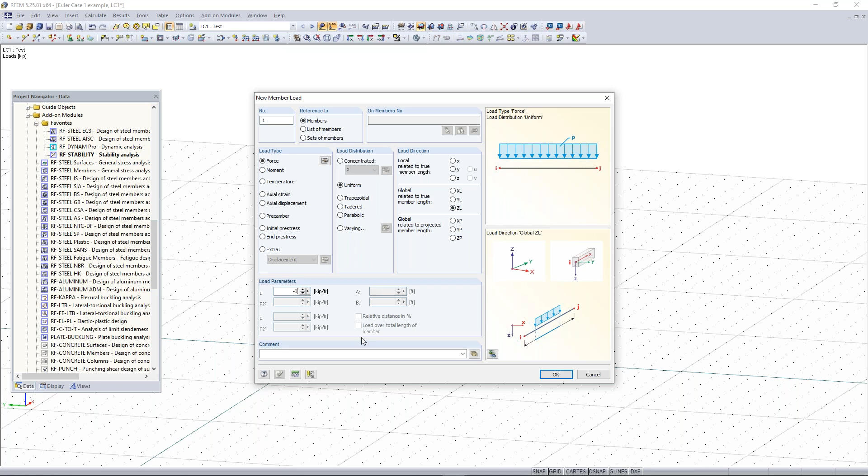And the next thing we want to do, now we have our moment frame, is add some loading to the top. So we have our loads on our columns here, but we want to add some loading to the top of our beam. So to add in the member load here, we can click on new member load. And then we can choose a force uniform, and load direction, we'll choose the global Z direction. And then our magnitude down here will be something like -3 kip per feet. So we'll click OK. And then we can add in our load here and choose our beam. So now we have -3 kip per feet applied to the top of our beam.

So now if we run our calculation for this, and we actually hit calculate all, it will calculate all of our load cases and even the results for our stability, which makes it easier because now if I go to my drop down here, again, I can see my load cases, load combinations, and result combination. I can go to RF stability. And then in the panel here, if I go under the tab here, factors, I can take a look at the eigenvectors here or the eigenmodes. So I can cycle through them and we can see our critical load factor here is 20, so that's good.

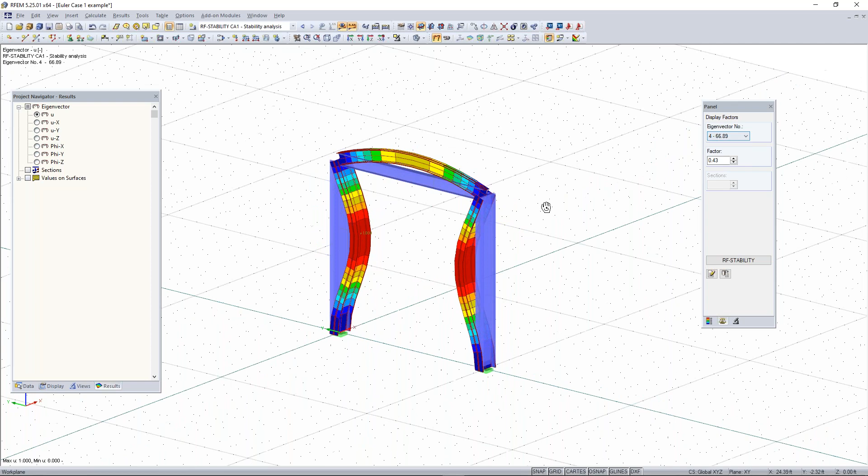Then we can see each of our eigenmodes here for this simple moment frame. We can also see that our third eigenmode is warping or deforming out of plane here. So let's say we wanted to make sure that normally our moment frame would stay in plane or have some type of support at the corners here. So I'm going to add in some supports here at the top of the corners by holding Control and selecting both of my nodes. And this is another way of adding supports.

So we can double click on the nodes there and then go to the support tab. And then we can choose available and I can hit create new nodal support. And then under this, I can choose to have those two supports be able to move in the X direction and the Z direction, but I don't want them to move in the Y direction. And then I'll unlock all rotation, click OK, click OK once more.

And now you can see that those supports are added and that they cannot move in the, actually we wanted these not to be able to move in the X direction. So let me change that real quick. So then we want to change this to the X. So now if I click OK, now these supports at the corners here are preventing the frame from moving in the X direction, but it can move laterally in the Y and then up and down in the Z.

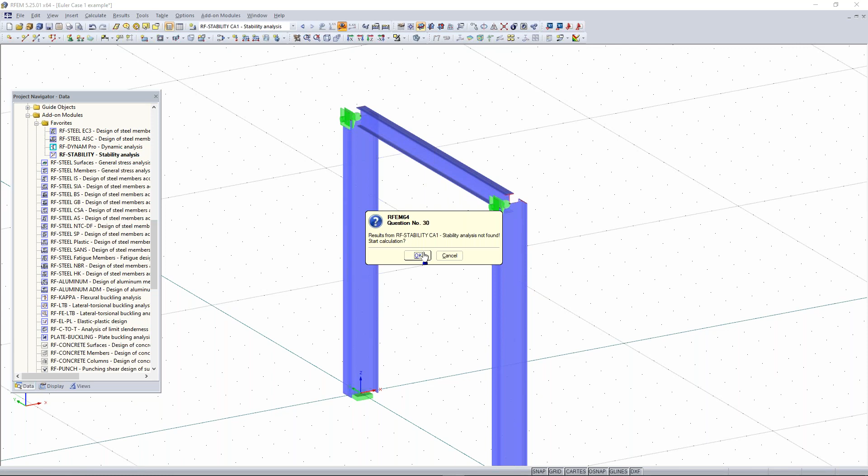So if I hit calculate, or I hit calculate all, the calculation will run, and then I get my results for our stability. So I can look at my eigenmodes here, and now you can see that all of them, especially this third one, is staying within this XZ plane, and we are getting good critical load factors. So that's how to create the simple moment frame from that column we had, and also how to run a stability analysis on your models.

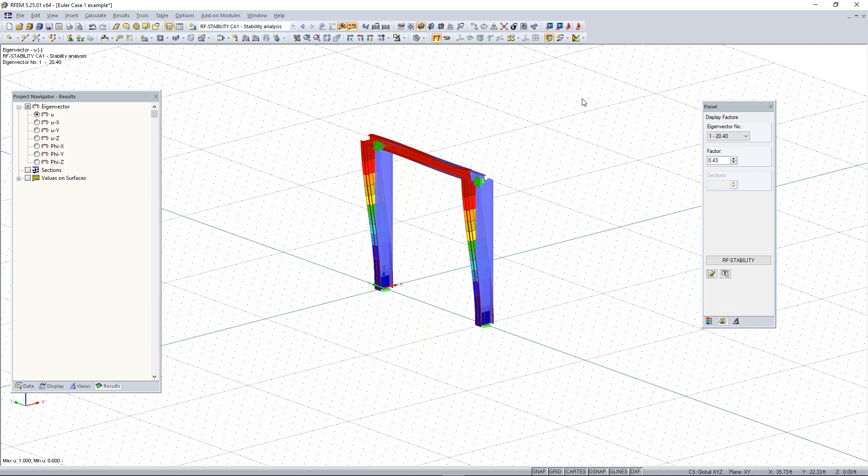Yeah, so we do have a direct integration method with AutoCAD. If I go back to RFEM, you can import models in from AutoCAD, so things like center lines are imported as a .dxf file, and if you're integrating line elements like center lines, that works great. Then you can save the cross-section name and material to those lines in the layers in AutoCAD and have those come over as members.

Keep in mind, members in RFEM are only 1D elements, so within AutoCAD you need to make sure to have the center lines for the members, because that's the most important thing to have imported over. If you just have the actual shape drawn in AutoCAD, like the perimeter lines or boundary lines, then all of those lines will be imported over and you can't really define the cross-section onto them.

With AutoCAD, things like surfaces are possible, but they have to be defined in AutoCAD as 3D faces to be imported over. If they're defined as 3D faces, they can be directly imported into RFEM, but if not, only the boundary lines of the surface will be imported over, which isn't too much of an issue — you can use tools in RFEM to create those surfaces from the boundary lines. Most importantly, for members, you want to make sure you have center lines, and within the layers you can define the cross-section data and material data to be imported over as well.

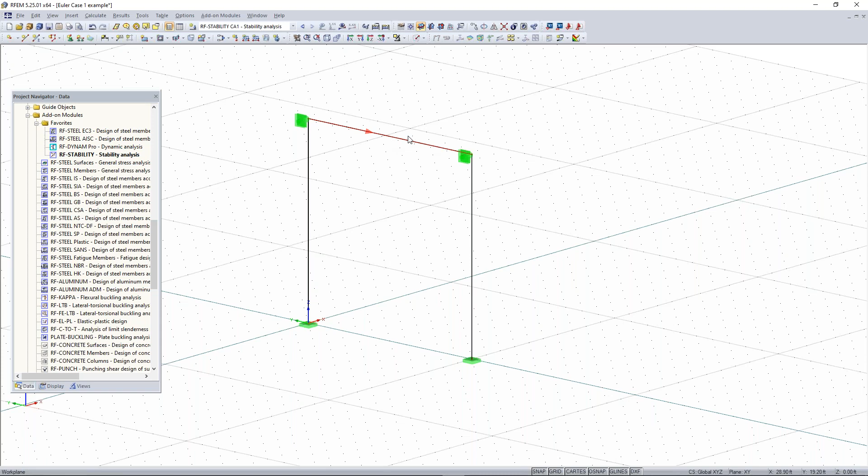If I double click on one of these members, this is a good subject to go over member types. So within creating or editing a member, we have different member types. Beam members can take tension and compression forces, and you can edit the member hinges for the start and end of the member. But you can also see we have cable member types here.

Cable member types basically only can take tension forces. They cannot take compression forces, just like a cable in real life would act, and you can't edit the end conditions of them. This member type will fail when it takes compression forces, and then it'll be able to take tension forces.

We also have the calculation method for cables, which would be large deformation analysis. So it is possible to run that. I'm not sure, maybe Amy has some more insight on this as well, but yeah, I think that's good. So that's cable elements, okay.

Cable elements can be modeled within RFEM, as Alex mentioned. Automatically, the program will default to the large deformation analysis because we know with cable elements they're a little special, in that the higher the tension force, the increased stiffness of the cable.

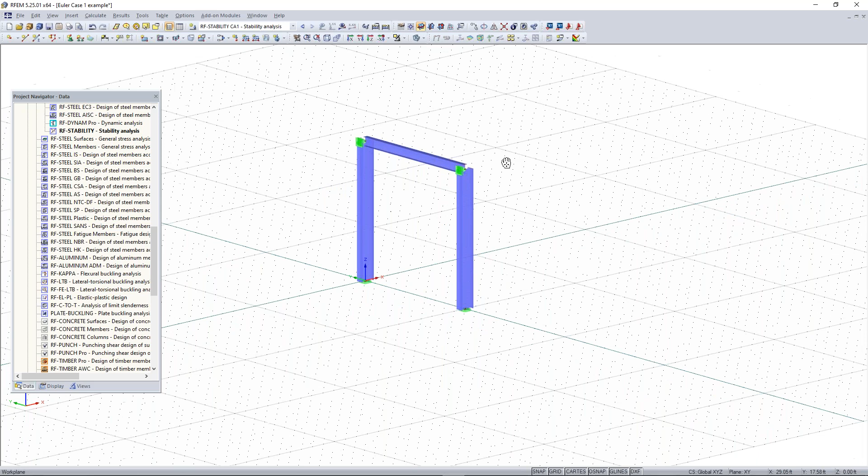The final question is, if we use two members as one metal column, like a built-up column, can we use RF stability the same way? Basically, if you have two members that are modeled separately but form one continuous column as what will actually be constructed out in the field, RF stability will behave the same way. It maybe doesn't necessarily change the mode shape depending on if the member is broken into two separate segments. Hopefully that answers the question.

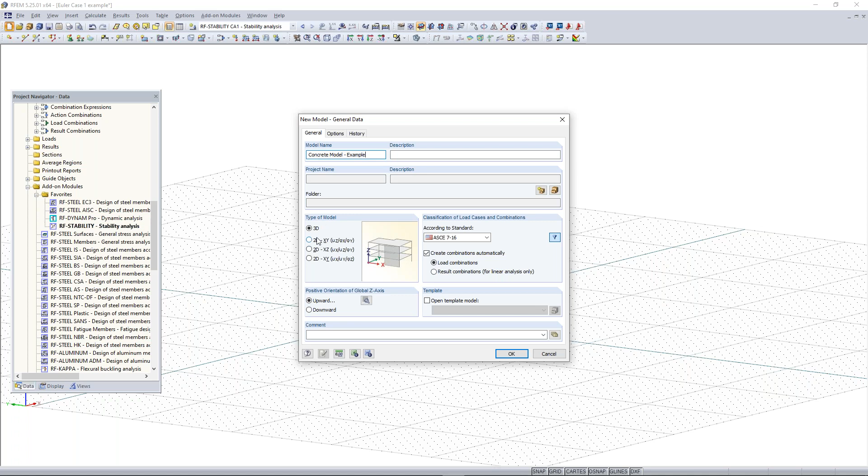So let's hop back to RFEM, and within RFEM we just need to create a new model. Within the new model general data, we can name this model concrete model, and we'll name this example. For this model, we'll keep it as 3D and we'll create our combinations automatically again. So we can click OK.

Our blank model will pop up, and we can begin by modeling a concrete surface. So we go up here to new rectangular surface. For this one, we're going to use the material 4000 psi according to the ACI, and the thickness of this surface is going to be 8 inches. We'll click OK, then left click on the origin, and drag out my surface. This surface is going to be 46 feet by 40 feet.

So we'll go up here and set it to 46 by 40. Then we can go up to our toolbar and click on the button called Show Whole Model. We can also choose the reverse Z direction so we get a top-down view of this.

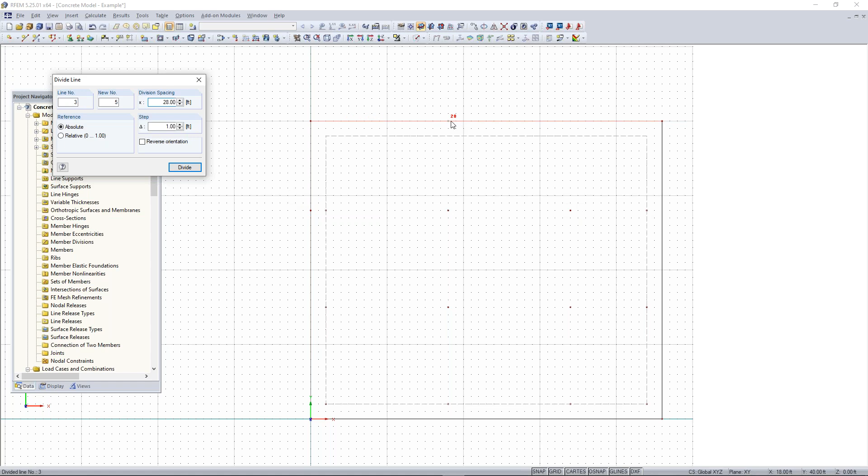This wall on the left-hand side here is going to be 12 feet, so it's going to be right in line with this column row. And then the wall on the top here is going to be 28 feet and right in line with this column line row.

And so now we can simply just proceed with going over how to model the spiral staircase on the outside here.

So I can go up to the semicircle surface here. Our rectangular surface has other options next to it, so if you hit this arrow, we can go to semicircle. What this does is allow you to draw a semicircle surface here. So if we create this, we just need to give it a thickness and a material, and then we can click OK.

And then I just need to select the center of the semicircle here. So I'm going to move down 7 feet, which is going to be the radius from the top here. So if I select that, and then I select my center point and the point on the corner there, now you can see we drew our semicircle there.

And then once we have that done, we can move on to creating our ceiling slab. So we'll take the floor slab here, and since the floor slab is the exact same geometry as the ceiling slab, it's going to be 12 feet within the distance between the two. So all we need to do is create a copy of our floor slab.

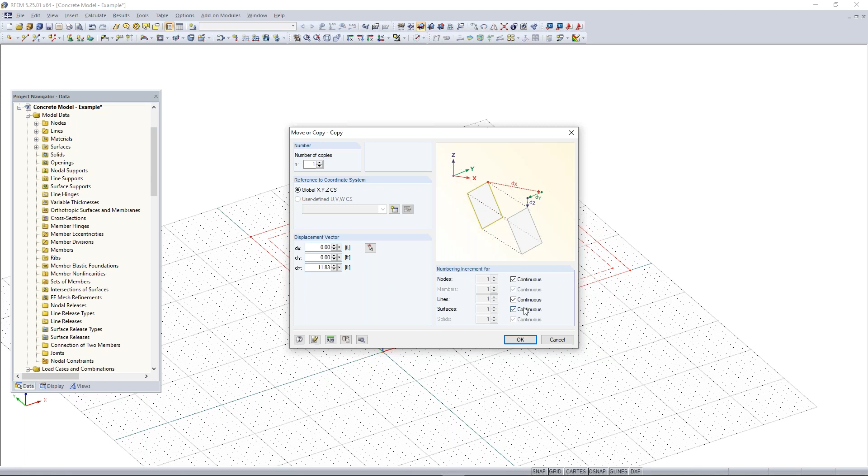So we'll move our floor slab upward 11.83 feet. We'll click OK, and now we have our floor and ceiling slab.

So now that we have both our floor and ceiling slab, we can take a look at it in our isometric view here. We can have that view predetermined, and then we can also get a top-down view. So if we look at it from the top down, we can't see both the floor and ceiling slab.

So what we can do is turn this into a perspective view. Now we can see both the floor and the ceiling slabs, and this will help with getting a better view on how our model is going to look.

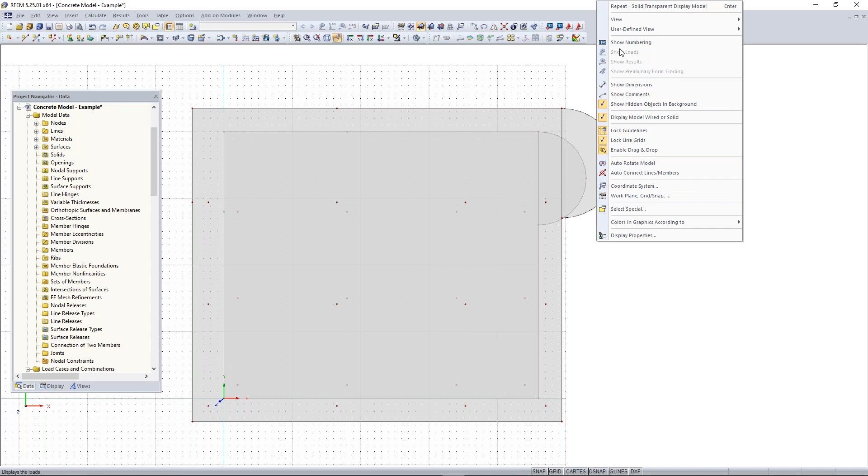So we can now divide our lines here. What we need to do is put a circular opening in our slab here at the top. And you can see that this line here, line number 10 — if I right click and show numbering, we can see the numbering of our lines, nodes, and surfaces.

Line 10 here is one long line. So what we want to do is break up line 10 into two different lines at this intersection point at node 40. To do this, we can use the tool up here, connect members, connect lines or members. I'm going to select that, and then drag over node 40 here. Now you can see that the line was divided between line 10, and now we have line 16 here.

Now what we want to do is divide line 16 by a distance of 7 feet. So I'm going to right click on line 16 and go to divide line, then distance. We want to divide this 50%, or 7 feet from the start or from the end, doesn't matter. So we can click OK. And now we have our center point here, and we have line 16, 17, and then again line 10.

And now we can simply just delete. We can take this also out of perspective view and put it back in isometric, and we can delete our two different surfaces here. So we can delete our surface there and then our surface here. And we also want to delete our lines 16 and 17 here.

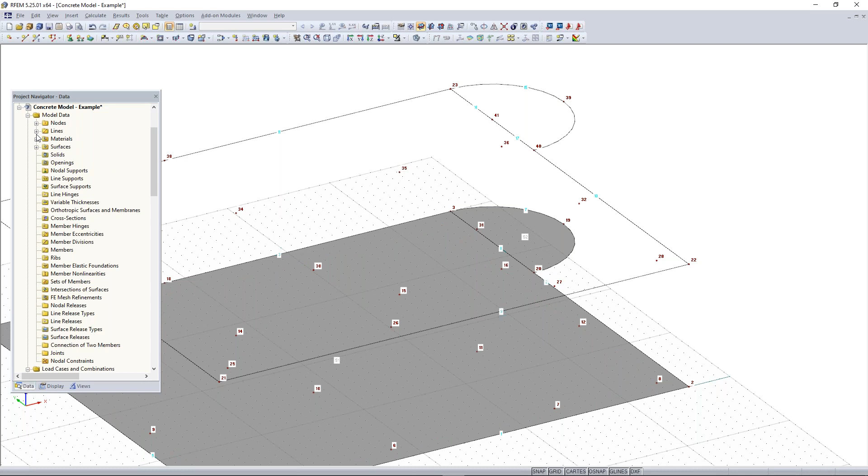So one way to do that would be to go to the project navigator, and you can go under the lines folder. And this is just another way of deleting or editing lines. So I can hold Shift and select both 16 and 17 and then hit delete on my keyboard. And now we want to redefine our surfaces.

So like I said back when, if you're importing surfaces in from AutoCAD, you may just get the boundary lines only. So if you need to redefine a surface based on boundary lines, you can do that with a tool up here next to the surfaces tool. If I hit this drop down arrow, I can go to select boundary lines.

I want to change this thickness from 8 inches to 12 inches for the ceiling slab. And then the material we can keep as concrete, and we can keep the stiffness as standard. So we'll click OK. And now all we have to do is choose our boundary lines. And you can see now we have one large surface for our ceiling slab.

Now we want to create an opening in our ceiling slab right here where our staircase will go. So for this, pretty simple. To create openings within a surface in RFEM, there is the opening tool here. So we can go up to openings, and we have rectangular, we also have some other ones like semicircle, but we want to choose the circular opening.

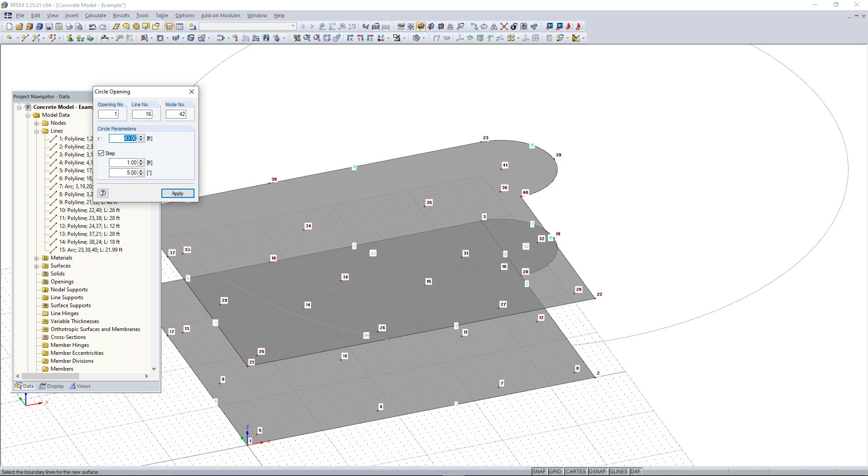And now I could easily set the radius to 6 feet, or I can also drag my cursor into this box here, highlight the parameters and change this to 6 feet and hit enter. And now you can see if I right click to cancel out of that tool that we have our circular opening here, and that will act as the opening for our staircase.

So now the next thing we want to do is define our walls on the perimeter of our model here, so we can change this into an isometric, and we can rotate the model and take a look at the side where our staircase is. And the next thing we want to do is create a wall right here. But first we need to define some lines to act as our boundary lines.

So we're going to draw a line that's going to be 7 feet from our node 20 here. So that will be at the coordinates 46, 19, 0. So if we go to 46 and we go to 19, we can select this, and then we can draw our line here all the way up to our ceiling.

And you can see that we have the snap function that shows you that you're drawing perpendicular to the top surface up there. So if I left click, then you can see that now our line has been drawn and it's perpendicular to both our floor and our ceiling slab. And now I can just draw another line on the other side to define our second wall here.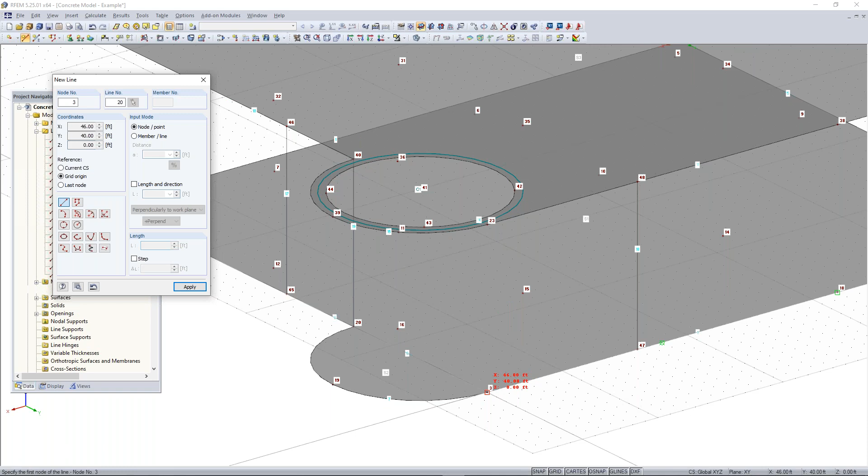Pretty easy. Then I can right click, and now all we need to do is connect nodes 20 here to node 40, and then 3 to 23, and then 18 to 38, 40 to 24, and then 17 to 37. So now we have all of our boundary lines basically for our walls.

So one last thing to do is we need to make sure that these lines where our vertical lines here connect are all split up throughout our model. So what we can do is use the connect lines or members tool here to connect those lines and split all of them up. So I'm just going to highlight the whole model. Now you can see these lines here are split up and connected.

And now what we can do is create our surfaces. Also, there's an option where if you right click and you go to this option down here, auto connect line / members. I have this turned off, but if you have this turned on, then anytime you connect a line to another line, it will automatically split the line like so. But like I have it, you can turn it off, and then you can do this manually using the connect line / members tool.

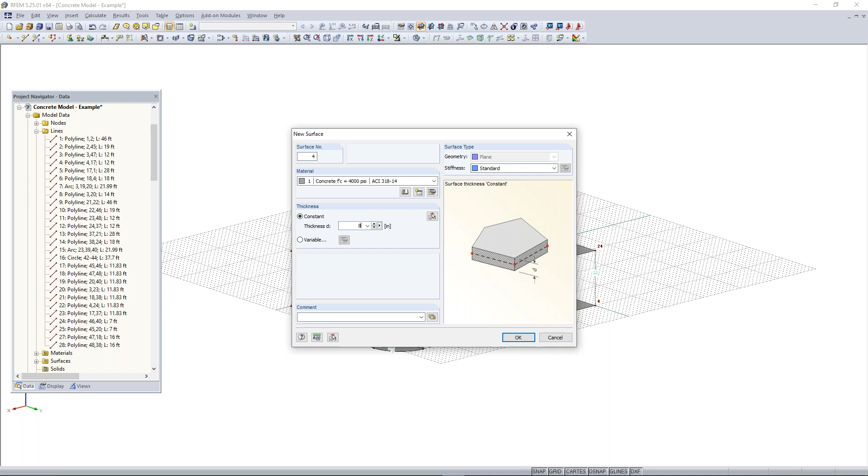So now we want to create our walls here. And again, we can use the new surfaces via boundary lines. And these walls are going to have a thickness of 8 inches instead of 12. So we'll change that, and then we'll hit OK. And then I can simply just go around and select the boundary lines for our walls here. And you have to make sure you select these in a chain operation, so if I choose this line, I can't choose this line up here. I have to make sure I go around so they're all connected.

And now you can see we have our flat walls there, and now we just need to create our curved wall here. And to create curved surfaces that don't lie in a single plane, and if they have 4 boundary lines, you can use the new quadrangle tool. So if I go up here to my tool here, we can go to the quadrangle tool, general 4-sided surface. I'll click on that, and then you can see, again, we can choose the thickness and the material. So I'll click OK, and then we can just simply choose the boundary lines of our surface here. And now you can see we have our quadrangle surface.

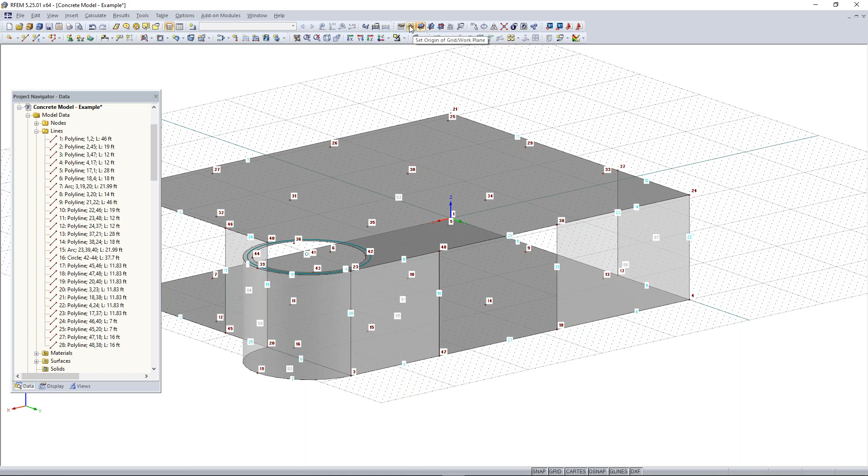So now we have basically all the walls to connect our floor slab and our ceiling slab. We're missing actually one more in the center, which will be our load-bearing wall. So what I need to do now is just change the origin of our work plane to node 18 here. And to change the origin of your work plane, you can go up here to this button called Set Origin of Grid / Work Plane. And then we can select node 18.

And then I can change my work plane here to the XY or the YZ plane. And I can draw a new rectangular surface. And I'll click OK. And then I just need to select node 18 and node 34. And now we have our new wall there. Oops. So that'll be our load-bearing wall in the center. And we can move on with creating our columns now.

So the columns, there's different ways to create these. We could just use the new member tool. Also, another way to create members would be to just draw the line first. So if I go to create new line, and then I connect nodes 5 to 25 here, I can take this line here and I can double click on it. And then we have a couple different tabs up here. You can add supports and FE mesh. We can add a member to this line. So I'll click available. And what this will do is bring up the new member dialog box.

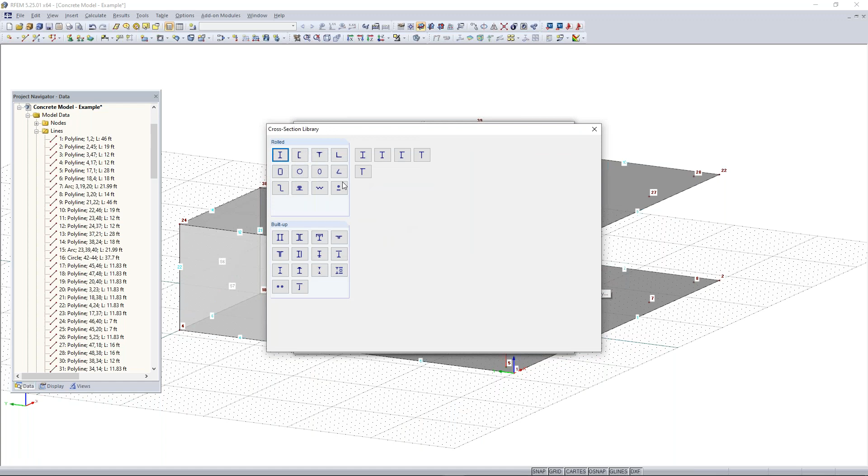And so from here, I can treat this line as a new member and give it a cross section and material. So I'll go to import from cross section library. And then once that comes up, I'll go to my parametric massive sections. And then I just need to type in the dimensions for the column. So these columns are going to be 12 inches by 12 inches. And the material is going to be concrete 4,000 PSI.

So now we can hit OK. And then you'll see the cross section will pop up here. We can hit OK again. One more time. And now you'll see that our line has turned into this 12 by 12 concrete cross section. So now I just need to take this cross section and add it to the rest of these nodes here. I can do this by just holding control and then dragging this over and creating a copy of it. So I'll hold control and then drag that one over, and then I'll undo that. So let's try that one more time.

And let's see if, there we go. Select this column and then, so now we have our row of columns here. And so now we just need to make a copy of this row of columns. Another way of selecting elements within RFEM is you can go up here to the select special button.

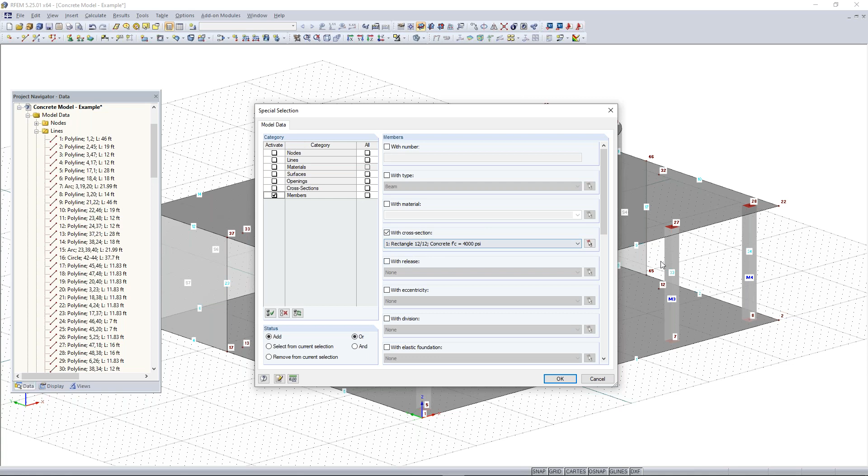And then we can use this to select different categories. So let's say for these columns, I just wanted to select members. So I'll activate members. And then I can choose over here on the right-hand side which type of members I want to select. So I'll choose with cross-section rectangular 12 by 12. And those are exactly my columns. So I'll click OK. And now you can see it selected all of my members with that cross-section.

So what I can do is just hold Control and then left click and drag. And now you can see that I made a copy of my rows there. And that's just an easy way of modeling the same thing. So then I just need to add one more column to connect nodes 15 and 35. So I'll just make one copy of that. And now we have all of our column members.

So now the last thing we need to do is create our load-bearing beam or our downstand beam that's going to connect our outer wall here to our load-bearing wall and to this column right here. So I'm just going to delete my node there. And to create this beam, we can go up here to new single member. And now I can just create a new member again. So I'll go to import from cross-section library.

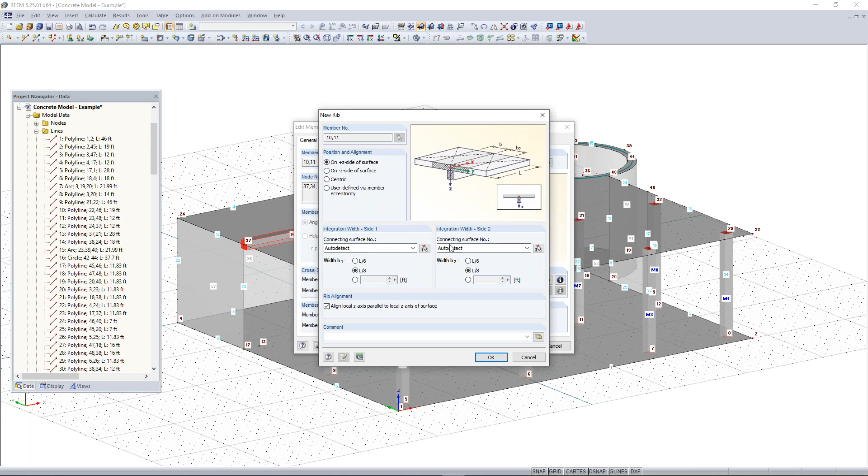So then we can draw our beam here and connect it to our load-bearing wall, and then connect and draw it to our column. And then we can just simply hold Control and select both of our members here. And then we can change our member type to rib, and we can again redefine those parameters here. So again, our rib is going to be on the positive side of the slab for the alignment, and then our integration widths for side 1 and 2 will be L/8. We'll click OK, and then you'll see that the program will drop this part down with an eccentricity, and the integration widths are there, but they're just not rendered.

So now we have our downstand beam, and the next thing we can do is add in our last opening to the back of our model here. So this will be our opening window into this wall. And this one is going to be 9 feet wide and 5 feet high, and located 3 feet above the surface axes there. So what we need to do is change the plane from the XY plane to the XZ plane, and then change our origin to the back corner here. And now we can draw our opening.

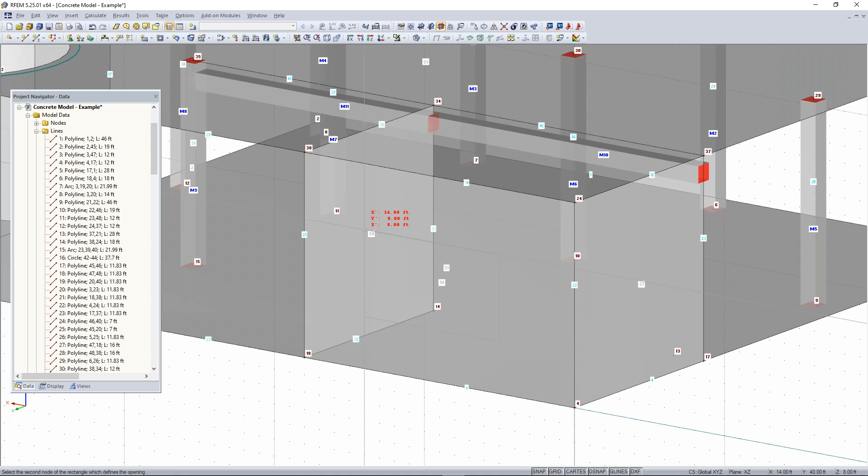So I'm going to go up here to rectangular opening. And then again, this is going to be 5 feet wide and 9 feet high. And so we want to start drawing it right here. And then that'll be the first corner. And then we can put the last corner, and that'll be right here. So 4 feet, 8 feet above. And now we have our opening.

So now that we have almost our whole model created, we just need to add supports to it. So we can add supports to the left side here. So we'll go up to new line support. And we're going to assume that the foundation of this building is adjacent to another one. So we want this line support along this whole entire length here.

And so we also want to make sure that it's defined correctly. This side's only going to be supported in the vertical direction, and so we want to take away translation. So again, if you check something, that means it's fully fixed. If you uncheck it, that means it's not fixed at all. And if something's partially fixed, you can add spring constants as well.

So for this condition, it's only going to be fixed in the vertical direction. The X and Y directions will be released along with also the rotation. So we'll click OK, and then click OK again. And now you can see we have our line supports there.

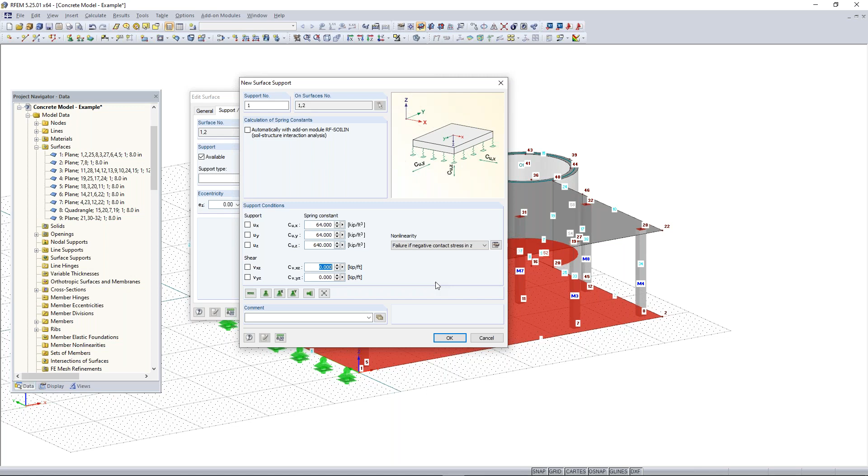But if there's compression, or if the surface pushes down on the so-called foundation, then there will be support for it. So that's what this means for the vertical direction. And then for shear, we're just going to enter some parameters for the spring constants, since it's not fully fixed in those directions. So we'll type in some values for the spring constants and click OK.

And now you can see our support is defined there under that tab for both our surfaces 1 and 2. So we'll click OK. And now you can see on both our surfaces here, we have our blue supports, and those are our nonlinear supports. If your supports are blue, that means they have some kind of nonlinear definition to them. If they're green, that means they are linear.

And all supports are applied at each FE mesh point as well. It's just graphically shown on the perimeter for rendering reasons. So that's how that's done. And then we need to add in stiffness modifications. So according to the American Concrete Code, ACI 318-19, we need to modify the stiffness of our concrete columns, walls, beams, and flat slabs.

So to do this, we can simply rotate our model to an elevation view and select and highlight all of our columns here. And then we can right click on any of these elements, and we want to edit our members. So we have 9 columns here. So we'll edit them. And this is how we can modify the stiffness of our members.

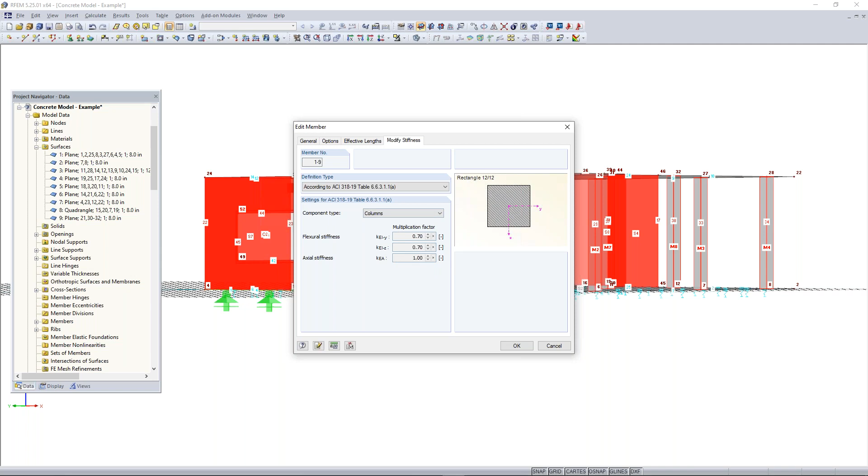So we can go under the edit member dialog box, and go to modify stiffness. And then for the definition type, you can either modify your stiffness using your own user-defined multiplication factors, or according to standards. So we have the Canadian code and also the American code for steel and concrete. So we'll choose the ACI, and make the component type columns, and the multiplication factors are automatically taken from the standard for columns.

We can click OK, and then we can do the same thing for our walls. So we'll go to surfaces and edit, and then we can change the stiffness by going to the modify stiffness tab, and then we can change this to the ACI and set this to walls uncracked.

And then we can do the same thing for our plates and slabs. So we can select both our bottom plates here and then also our ceiling slab, right click on them, edit surface, and then we can change our stiffness here to something like according to the ACI, and we want to set this to flat plates and flat slabs.

And then the last thing we would need to modify is the beam here. So we can hold Control and select both of those, go to edit member, and then we can modify the stiffness of the beam here. So it will be according again to the ACI, and then this will be for beams.

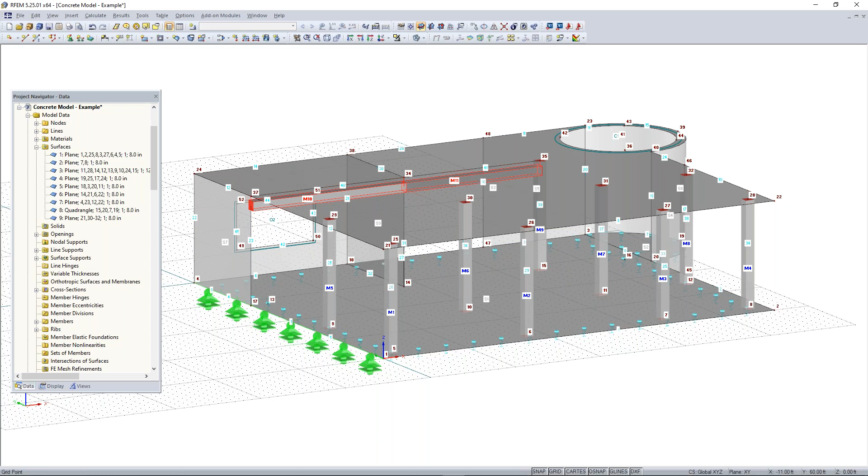So now we have all of our stiffnesses modified, and the next thing we would need to do is run through the loading, but it looks like we're running a little out of time, so we only have a couple minutes left. So what I can do real quick is just create a new load case that just involves self-weight instead of adding any loading, and we can just quickly see what the results would look like for this model. So I'll just create that real quick, and we'll just run the model based off of self-weight.

So this will run and shouldn't take too long since we don't have a lot of loading. So this is basically the results. So right now we're just looking at the deformations, and if we turn this into a wireframe view, we can kind of see those better, and we can see those surface deformations, and then we can go through our results for this, and we could design this model, the concrete slabs and columns and beams in our concrete add-on modules.

So this is what the results for that would look like. And then we can also see the factors for our deformations. So you can see deformations are very low, only at 0.1 inches for maximum deflection. And so we can go back to the PowerPoint, and then that basically takes us to the end.

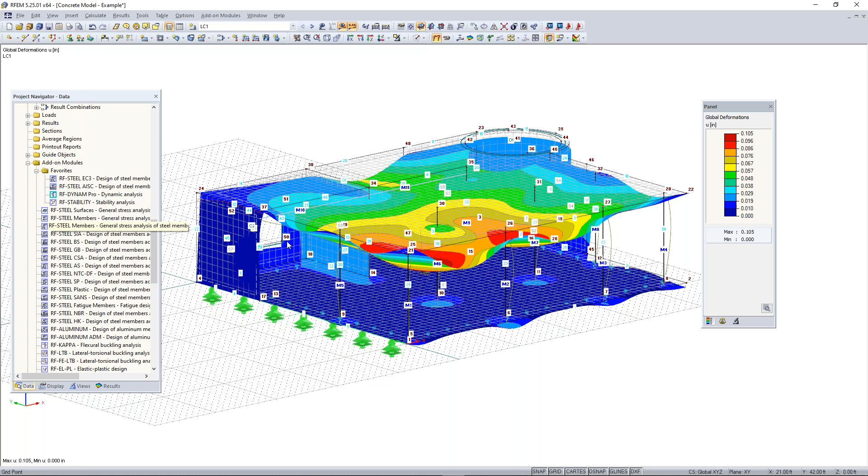The other question is, can we add reinforcement to concrete structures in RFEM? So Alex, you can go ahead and take that one. Yeah, so like I said, for the structure, for example, for the columns and the beam, we would use the add-on module. I don't have it saved in my favorites. It would be RF-CONCRETE Members. So you could use this add-on module to design the reinforcement, like the longitudinal reinforcement and the shear reinforcement.

And then we can also design the reinforcement for the concrete surfaces as well using the RF-CONCRETE Surfaces add-on module. So I think that should answer your question.